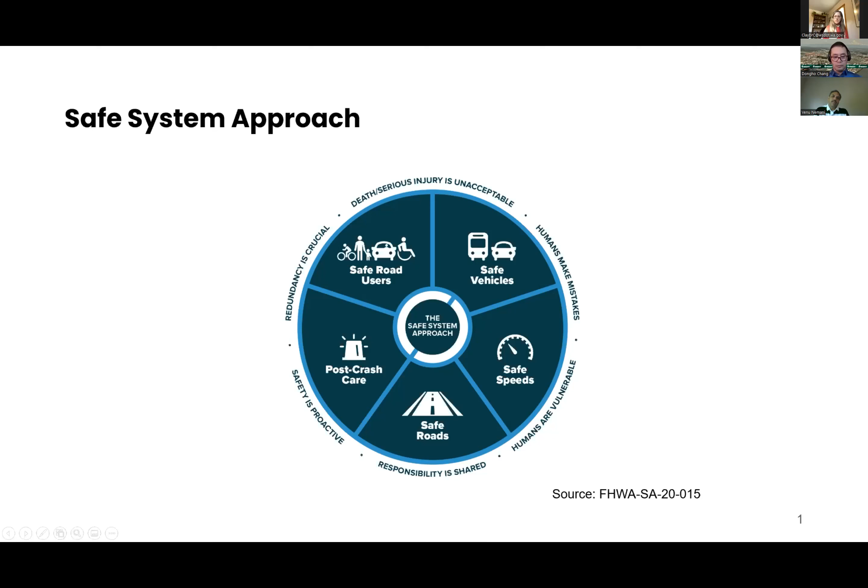Let's see, how do I... Okay, so what impacts the streets and speeds on our roads is really how our streets are designed, the laws that govern them, and sometimes the enforcement that comes with it, right?

So many of you who are in communities will recognize these same type of streets all over our neighborhoods. These are streets that are designed to make sure that goods and vehicles are moved efficiently, and they are designed in an engineering standard that performs that function.

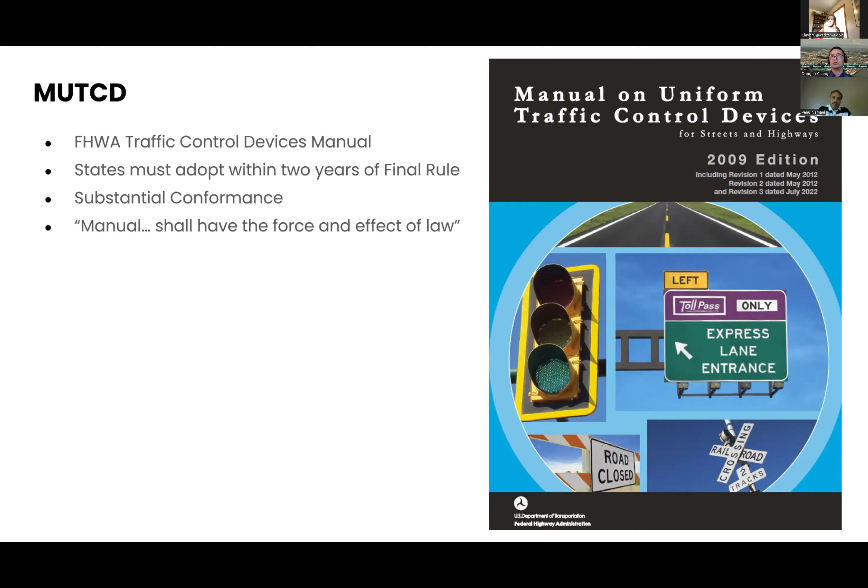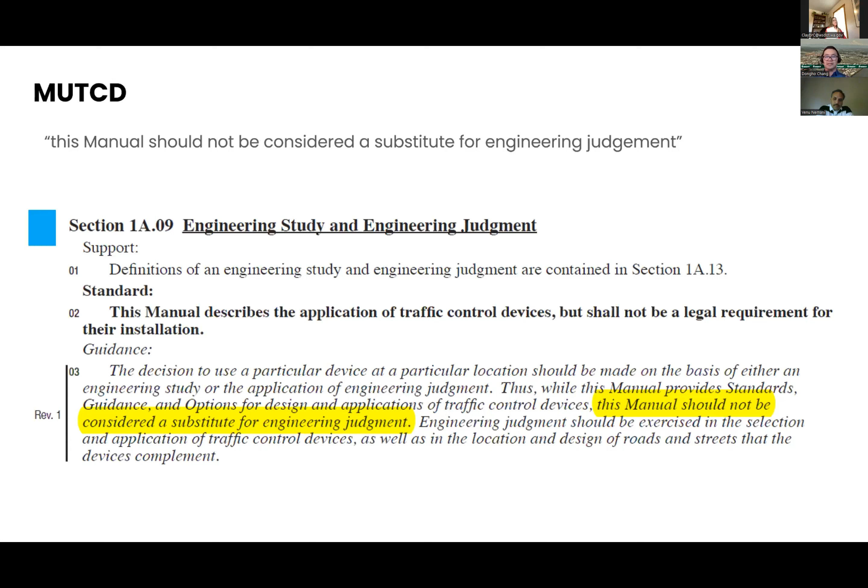And in reality, the manual is pretty flexible. So if you read through the manual, it provides that this manual describes traffic control devices but shall not be the legal requirement for their installation. And this manual should not be considered as a substitute for engineering judgment. So it means that the application of the manual is really up to the individual whose responsibility is to exercise their engineering professional judgment in applying these traffic control devices.

So again, it is up to all of us to make sure that we are using common sense and our approach to make sure that we are serving the needs of our community.

Washington State has a policy guideline called the Washington State Injury Minimization Speed Management Policy. It was developed in 2020 with a group of stakeholders, including FHWA, local city officials, engineers and traffic engineers. Really it's to adopt and implement a framework that looks at how we can minimize any kind of injuries that occur on our streets based on the context it's located in.

And we're using a safe systems approach to identify and prioritize how we make these investments and improvements, and then employ our thoughtful roadway design treatment so that we achieve the operating speed that we need on a particular facility.

So I got a chance to visit Spokane last week, and this is West Main Avenue, in the heart of their downtown. To the right was what West Main Avenue used to look like: 4 lanes, parking on both sides, pretty wide in the heart of a business district. So it's really engineered to move vehicles.

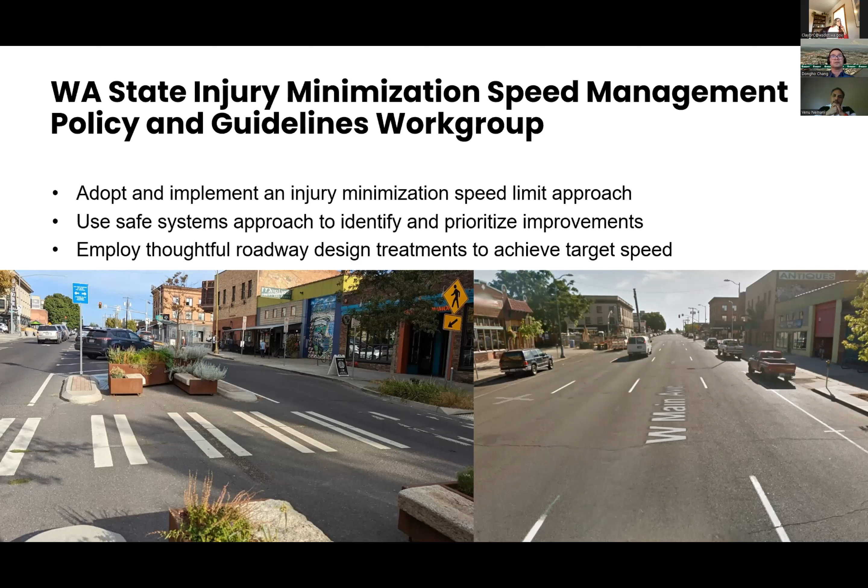These are things we have the ability to change everywhere in our environment, and these interventions have really positive consequences. It slows the operating speed of the driver, and it creates an environment where a person who is walking, biking, or a patron of these businesses has a conducive environment where they want to linger and frequent these businesses.

And how do we avoid crashes? We do that by roadway design. We separate users in space. We separate users in time with signal phasing, and we create self-enforcing design that produces the behavior we want from all users.

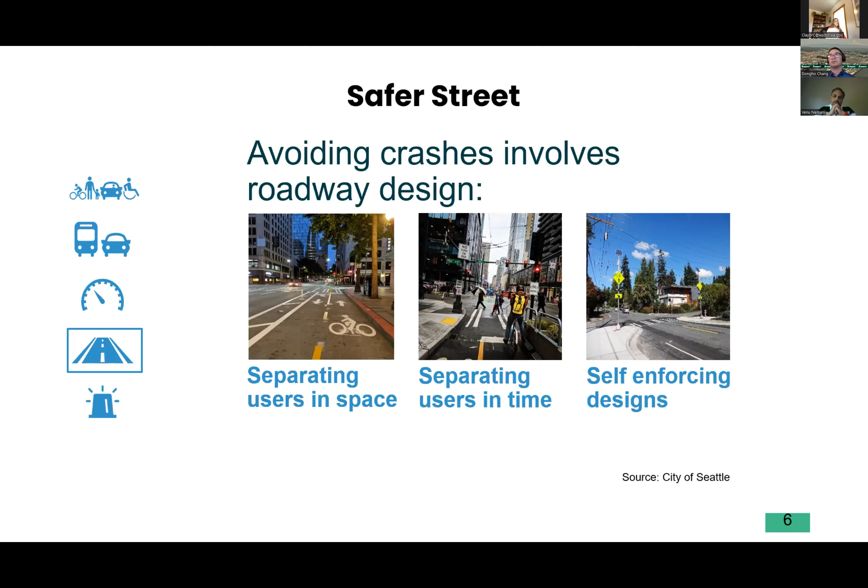The safe systems implementation is really about reducing the operating speed of the vehicle, so that we can reduce the kinetic energy. If someone does make a mistake, it's going to hopefully result in property damage, not severe injuries. And certainly, we don't want anybody to have a fatality in an interaction.

One of the tools we really look at for that is roundabouts. The design of the roundabout is really about reducing the operating speed at the location where all the conflicts occur. That's a great tool, a proven safety countermeasure that we will continue to implement.

One of the items we need to do a better job of is ensuring that we are accommodating and prioritizing pedestrians and bicycles in our roundabout design and implementation. We also need to make sure we are designing for that target speed, so we're looking for that self-explaining, self-enforcing roadway that slows driver behavior.

In the very last bottom photo, you can see a raised crosswalk in Shoreline. If someone approaches that intersection at high speed, that behavior is not going to happen a second time. It's self-enforcing design that changes behavior through geometry.

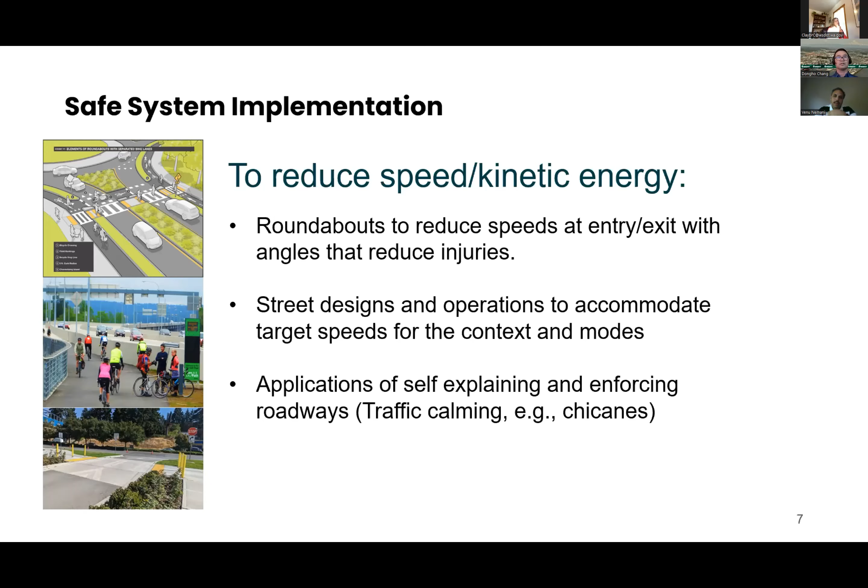Another location I got a chance to experience in Spokane was when I was traveling from the airport to downtown during week without driving last week. I was taking the bus, and what a convenient and great service it provides. I was able to witness a bicycle rider on the airport side of this connection, and I made a point to go out and experience how that person experienced the facility. There's a section that I thought was a really good change.

This is the I-90 business loop, which used to be 4 lanes with turn lanes. You can see on the left there wasn't any space for people walking and biking. In the revision, one of the lanes was repurposed for walking and biking. You can see an 8-inch wide curb that was put in to create that additional space, along with a crossing treatment.

By and large, the experience was night and day different. On this portion of the roadway, if you're on the separated facility, it's much more conducive to a comfortable experience. The other side has a painted bike lane, and it's 40 miles per hour, but it feels quite a bit faster—not as comfortable, not as convenient, and not a facility I would feel comfortable using every day.

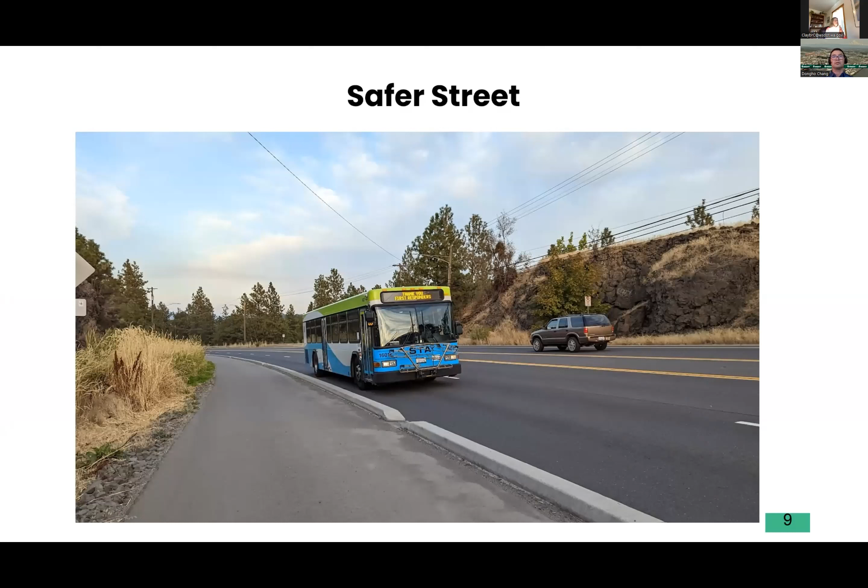So there are tools, easy to look at, where we can repurpose streets and lanes to accommodate safer behavior. And of course, drainage—you can create an opening, and that's what this project did, creating an opening in the curb to make sure water flows into that little wetland ditch. It's 12 feet wide so you can get a sweeper in there, easily maintainable, and it created a great environment with a minimal amount of additional infrastructure.

There are things you can do with just how the intersection is implemented.

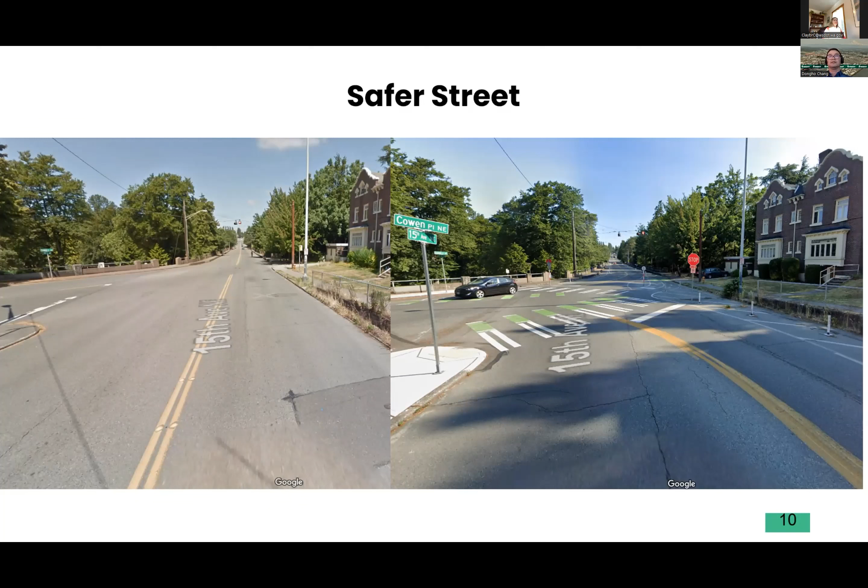There's a park on this one side. There's a high bike ridership in this corridor, and it definitely serves the multimodal, all-users better with the intersection reconfiguration.

I also want to highlight things that we as a profession are trying to revise with the new legislation, really thinking about holistically how we're accommodating all users on our roadway.

This is SR7 down in Spanaway, where a number of collisions are occurring, and as part of our safety review, this location came up for evaluation. One of the things we looked at was the site conditions: high speed, rural condition coming into a developing area, 55 miles per hour coming into a shopping center, moderate residential, and housing development coming up in the future.

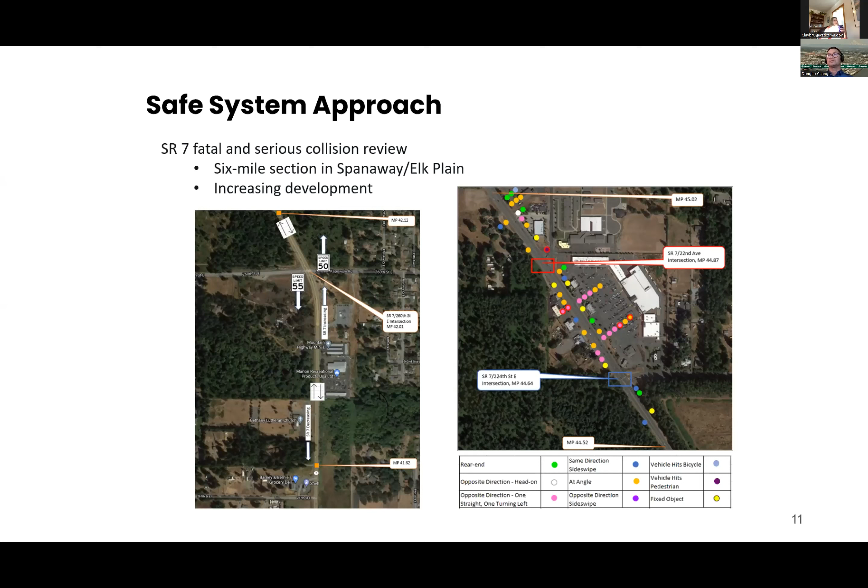Collisions that are occurring, you can see with all the colorful dots, and it's increasing over time just because of the number of interactions occurring. I'll show you what it looks like at that location where all the collisions are happening.

This is actually a location I'm very familiar with - this is where I grew up. You can see there's no pedestrian facilities. It's 50 miles per hour, pretty high speed, pretty daunting area. There's bus service here, and not much space if you're not in a vehicle. And even if you're in a vehicle, it's not a very comfortable space.

This is Field Road, the location I had to cross every day. I crossed Field Road to get to that 7-Eleven as a kid in elementary school. We used to gather and play video games - my best friend's across the street here. So this was my daily crossing. And earlier this year, someone walking across was killed crossing the street.

The prior paradigm was that we would look at maybe a crossing treatment, but what's really important about this location is that as it develops, there's going to be more and more people walking and biking. There are already people doing that. It's a lower income area, there's mobile homes, people who cannot afford a vehicle - they're taking transit, they're walking to the grocery store. Really, it's the operating speed that's not very comfortable.

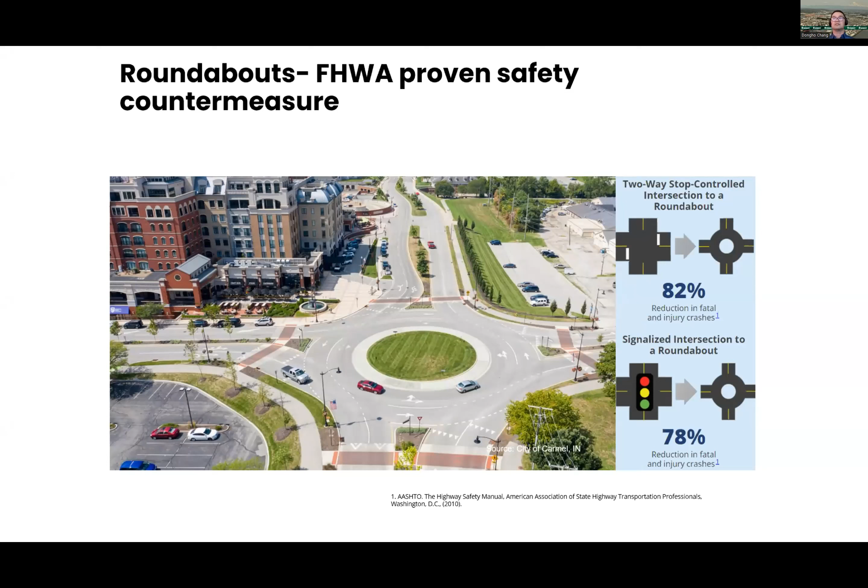And these roundabouts are so effective - they have a history of improvements, an 82% reduction in serious and fatal injury crashes when a stop control intersection is converted to a roundabout. If you have a signalized intersection, it's just as effective, almost a 78% reduction.

You may say that's actually 50, 55 miles per hour, it's a high-speed facility, how is that going to work? Well, we've tested it out in a high-speed facility. This is Mattawa, Washington, 65 miles per hour. Not much in terms of friction.

It's a rural roadway, but experiencing severe crashes where the community has to cross this roadway. During peak time, the gaps are really hard to find, so there's a huge amount of queuing that occurs. People get pressured and take chances trying to find a gap that might not be appropriate.

The community embraced the roundabout as an option to test out. From that 5-year period: 21 crashes, 22 serious injuries, and 2 fatalities. The roundabout was put in, and within the 7 years afterwards, no serious injuries or fatal crashes. It really has proven itself in terms of safety performance.

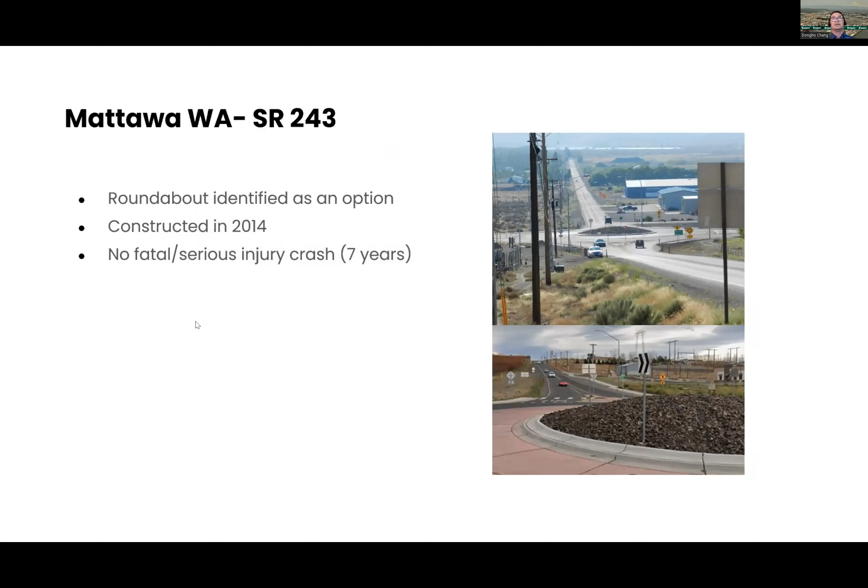So the MUTCD, again, it's really flexible. Ask your engineers, your municipality, to work with the flexibility that's given.

Pilot project, this is Bell Street. It was converted to a park, Bell Street Park. You can see the change in the physical environment from a roadway that's really designed for vehicles to a space that's conducive for people walking and biking.

In this location, a memo was created that established this as a park boulevard, and the features designed to guide traffic are being removed. You can see on the picture on the right, initially vehicles were meant to turn right. If you go there now, those vehicle signal heads are gone, and the vehicles actually cannot go through.

It's a stop condition, and pedestrian and bike prioritized. Even the street name sign is brown to signify that it's a recreational space.

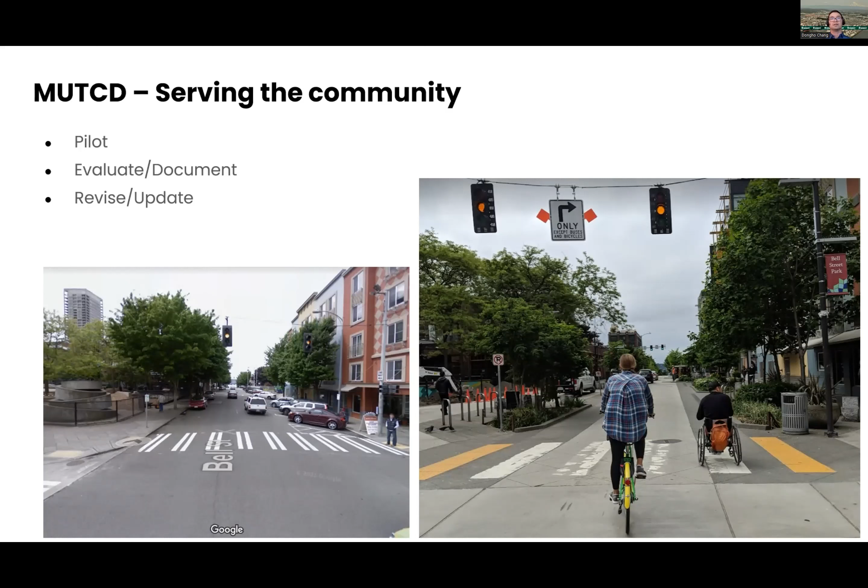Again, a daunting crossing location. We're never going to get the volumes of people crossing at this kind of condition. You have to prioritize that movement, put in the installation so people can cross, and make sure you have all the implementation in place so it's easy to utilize. And if it's not, you've got to figure out why and make sure those elements are fixed.

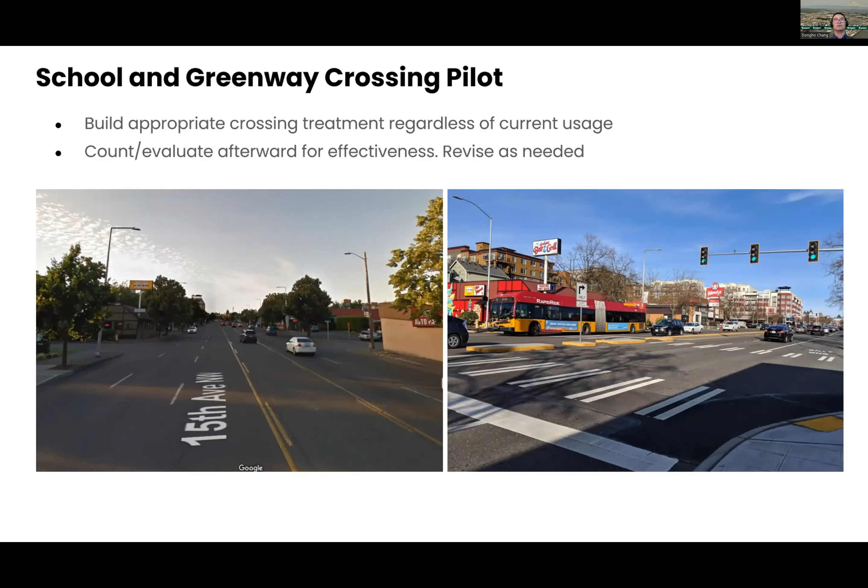We have data that shows it is very effective. It has huge safety improvements, and a broader safety improvement for the whole area.

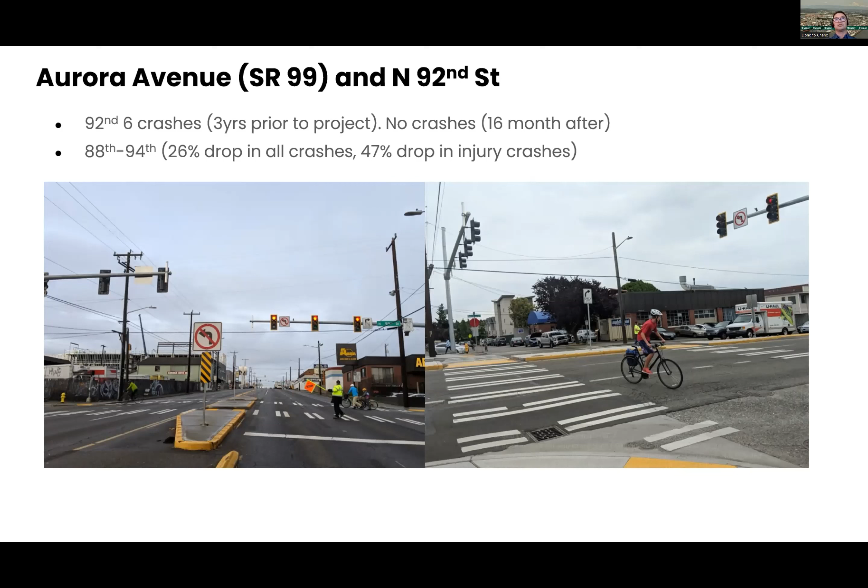In a broader area, we saw a safety benefit of a 26% drop in crashes approaching the intersection, and almost a 50% reduction in injury crashes. That's because people are slowing down. The environment has changed, operating speeds have changed, and you can do physical changes like raised crossings to make sure people are operating their vehicles at appropriate speeds.

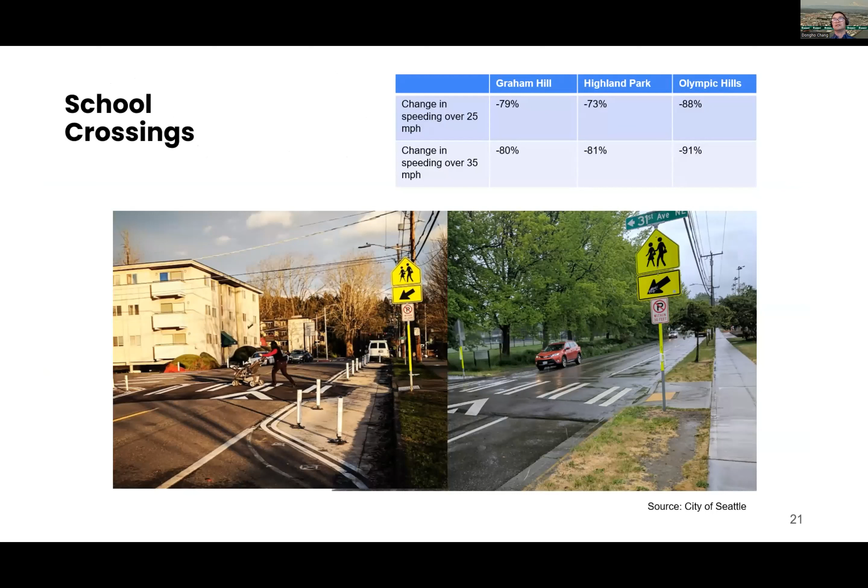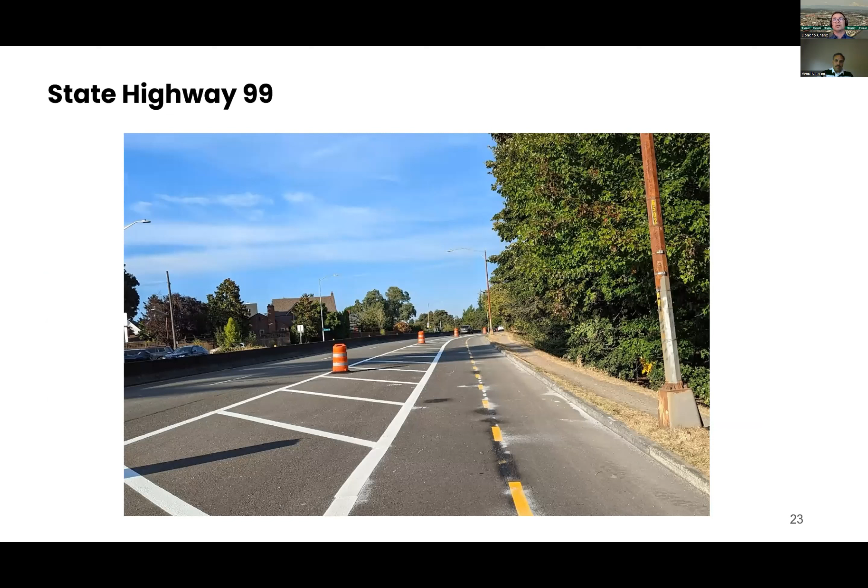Of course, we're trying things out like on Green Lake, repurposing that space. That project is happening now, where we're taking one of the outside lanes and creating space for people walking and biking. Why are we doing that? Just making sure we're making facilities comfortable for all users, especially people who would not even venture into those types of spaces if we do not take this action.

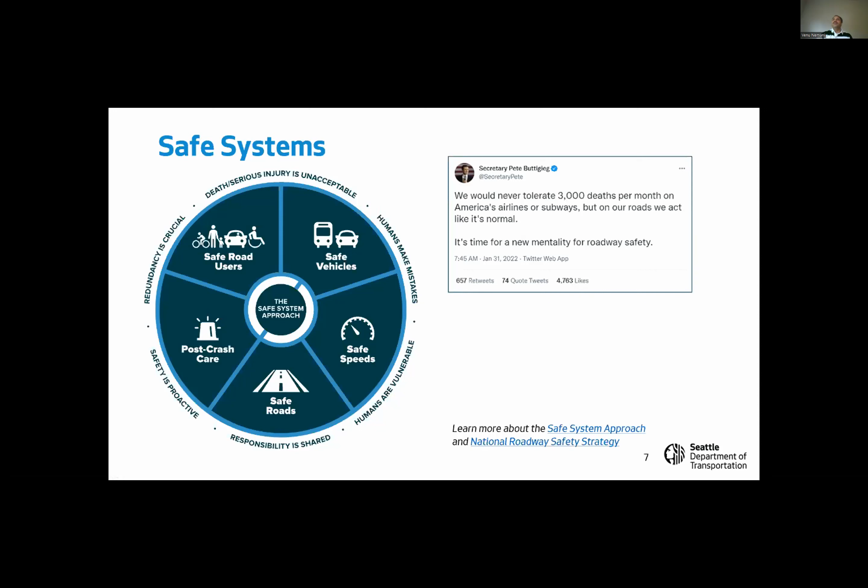So here is the safe systems approach that Dr. was referring to, the two quadrants where we have most influence: safe speeds and safe roads. I want to share a quote from our Secretary of Transportation, Pete Buttigieg. He tweeted, 'We never tolerate 3,000 deaths per month on America's airlines or subways, but on our roads, we act like it's normal. It's time for a new mentality for roadway safety.' I can't emphasize enough why this encapsulates why we need a paradigm shift in our thinking and how we approach safety.

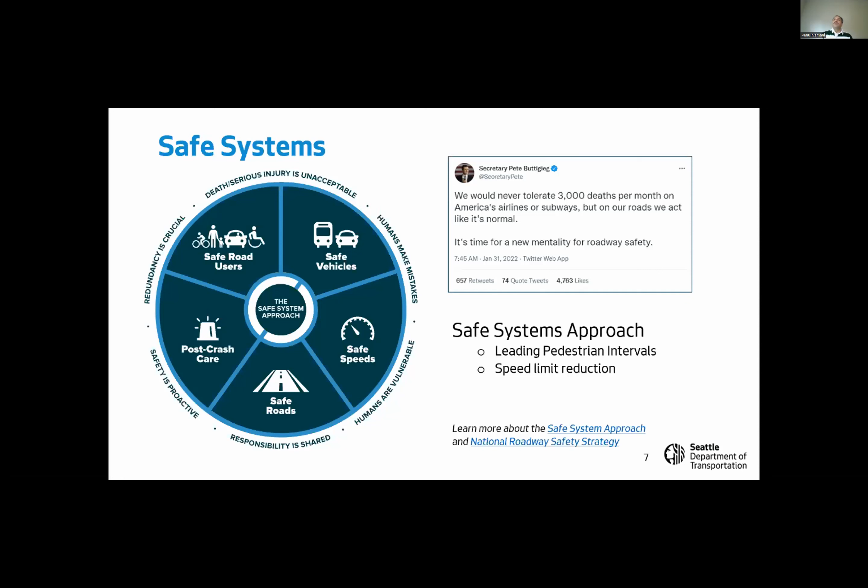So I'll give you two examples of our safe systems approach: leading pedestrian intervals and speed limit reductions. We have done substantial work in the recent past on our streets. The first one I want to talk about is leading pedestrian intervals. We know that about 40% of our serious and fatal pedestrian collisions occur at signalized intersections. A leading pedestrian interval gives pedestrians a head start to establish themselves in the crossing so that they're more visible to turning traffic at signalized intersections, thus avoiding serious and fatal collisions.

Over the years, we had very few intersections that had leading pedestrian intervals, and now we are doing this systematically, and we have improved almost tenfold the number of intersections in Seattle that have leading pedestrian intervals.

Every time we go through a corridor signal retiming, we ask ourselves where can we implement these leading pedestrian intervals, and make it a default of placing them and part of our timing plans. There are significant benefits: a 50% reduction in injuries, a 35% reduction in serious and fatal collisions.

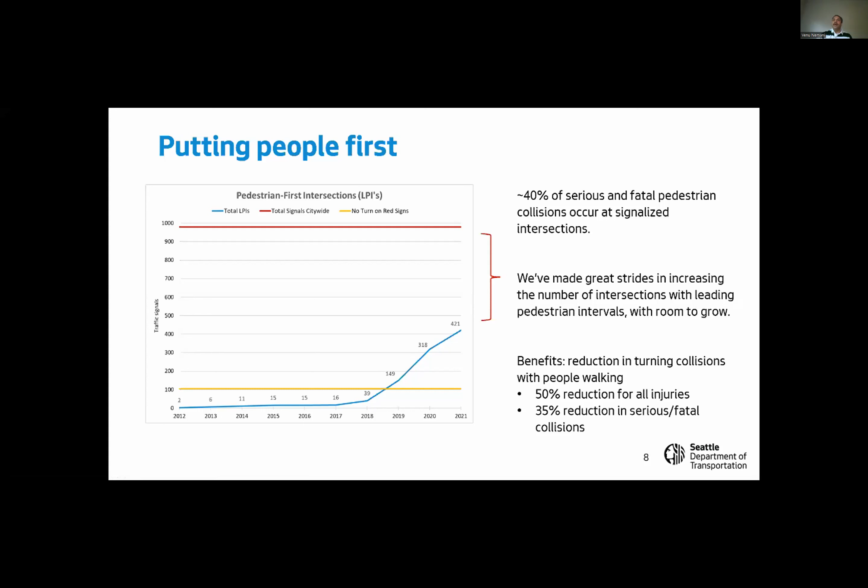Another intervention I want to point out is no turn on red. We are working right now to apply the same safe systems, systemic approach to employing more intersections that have this no-turn-on-red restriction, which helps with the pedestrian and turning traffic conflicts we see at intersections. We are getting ready to package this up and get started on implementing it on a more system-wide basis, and you'll see that in the near future.

So let me take a little bit of a different direction and go through what guides our design philosophy to influence or have slower speeds on our streets.

We base all our design ideas on our Streets Illustrated, which is our right-of-way improvements manual. It provides guidance on street design and informs our complete streets checklist, filled out for every single project, asking how that project is influencing the design and addressing concerns of pedestrians, bicyclists, and how we will accommodate transit.

So our Streets Illustrated establishes a typology based on the place of that particular street in our network and also the function it serves. We have about 12 different street typologies, with certain target speeds assigned to them, and our designs in Streets Illustrated consciously try to promote the target speeds established for these various sections.

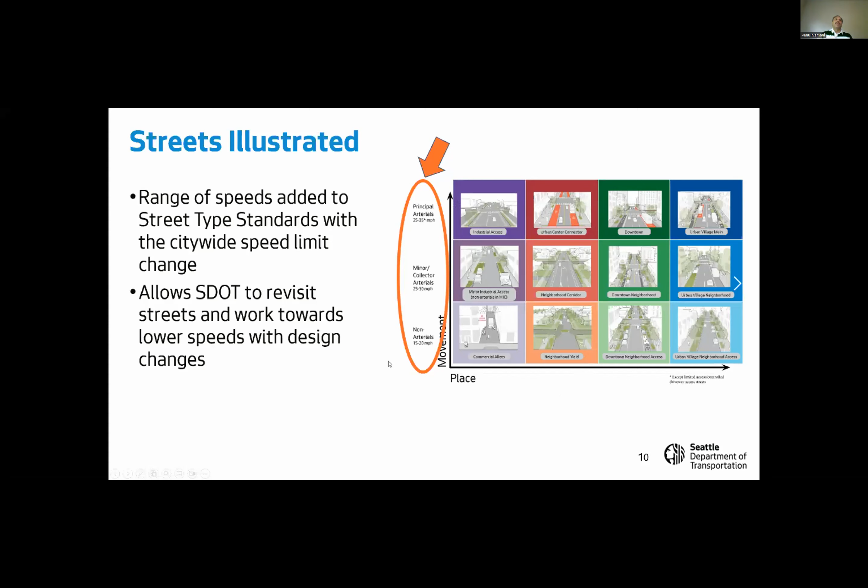So let me go into a little bit deeper dive into traffic calming. We have a whole bunch of tools within our toolbox to influence speeds and lower them on our street network, and I broadly classify them into two groupings: arterials and non-arterials.

Within arterials, I'm going to talk about our citywide speed limit change and various street redesign and reallocating space strategies employed on a number of projects. I'll talk about speed cushions, raised crosswalks and intersections, hardened center lines and robust center line posts, which are a relatively new strategy we are piloting, and radar feedback signs, along with a new effort to understand speeds on our network.

Similarly, on non-arterials, there is a list of tools in our toolbox that we employ as we go through their street redesigns.

So let me first start with the citywide speed limit change. We did complete and employ a citywide speed limit change. Most arterials within Seattle are now posted for a 25-mile-an-hour speed limit. Here's a comparison of the lane miles that had the speed limit before and after the change. As you can see, beginning in 2021, almost 90% of our arterial speed limits were reduced to 25 miles an hour.

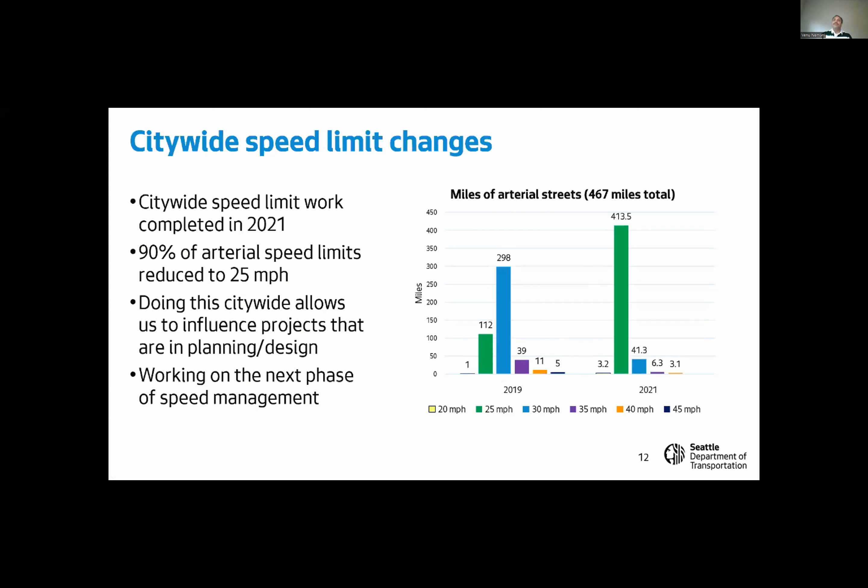So how did this speed limit change affect things? We did some before-after studies, and without any educational or outreach activities, just changing the speed limit and consistently posting it at quarter-mile intervals on the arterial segments, we saw the 85th percentile speeds change moderately, but we saw higher reductions in top-end speeding, people going more than 10 miles over the speed limit, since we made this citywide speed limit change.

Again, from a crash performance perspective, the total number of crashes on average, before on the 3 or 4 segments that we have seen, and 1 year later we have seen a substantial reduction in the total number of crashes on these exact same segments where we lowered the speeds.

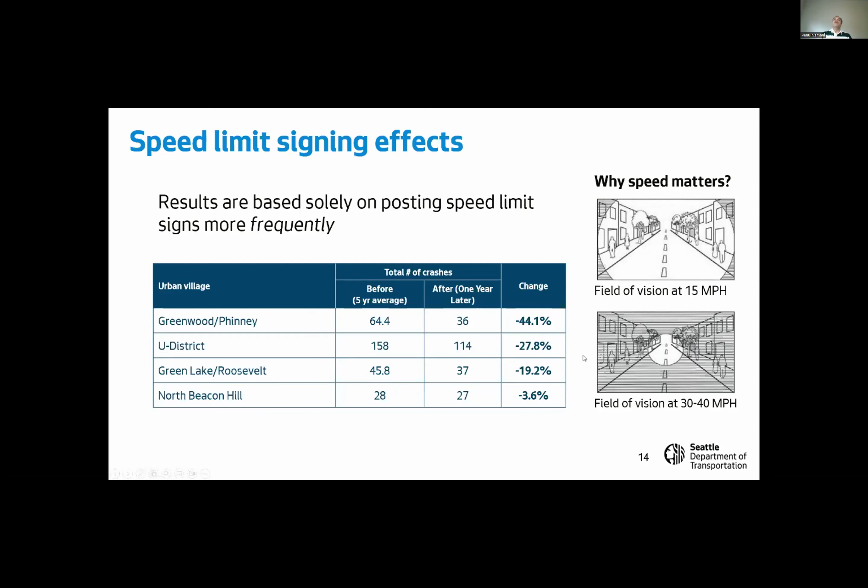Again, Danko showed several examples of reallocating space. This is, I believe, the most significant strategy on our arterials to influence the design and change the behavior and lower speeds. The example I would point to is on Rainier Avenue. We did a phase one of this project in Columbia City and Hillman City, where we took a 4-lane road, implemented a road diet, and completely reconfigured the street, as you can see in the before and after pictures.

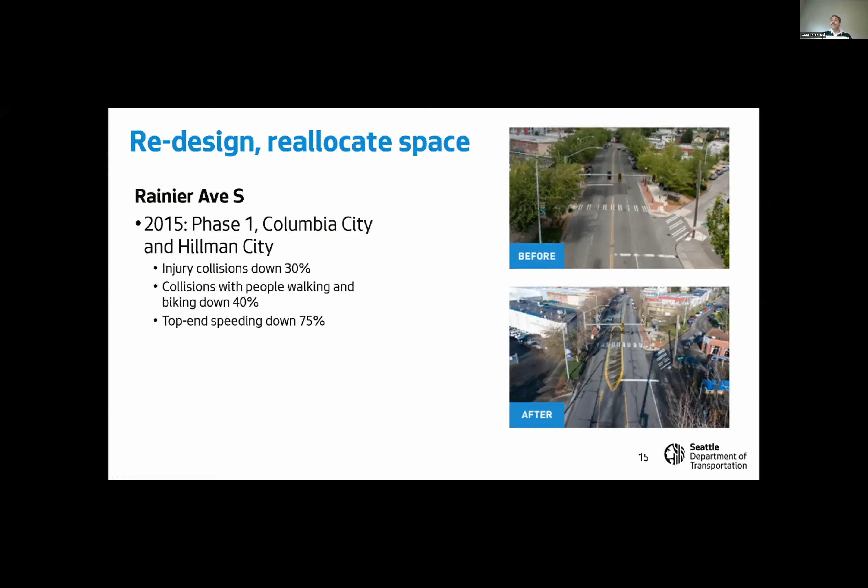Our injury collisions were down by 30%. Collisions with people walking and biking were down by 40%, and top end speeding was down by 75% - substantial improvements.

Most recently, we are continuing several phases of this work, and in 2022 we have prioritized transit on this corridor. Again, reallocating the space that we have on the street and prioritizing and giving space to transit, reducing that footprint or the impression of drivers that it's a wide open roadway and they can take higher speeds. This particular transit improvement or street reallocation design also helps the Route 7 transit line. It's one of the highest ridership routes in the state and a lifeline for the Rainier Valley community. It enhances their transit speed and reliability, especially during congested peak hours, and makes progress towards the city's climate and equity goals.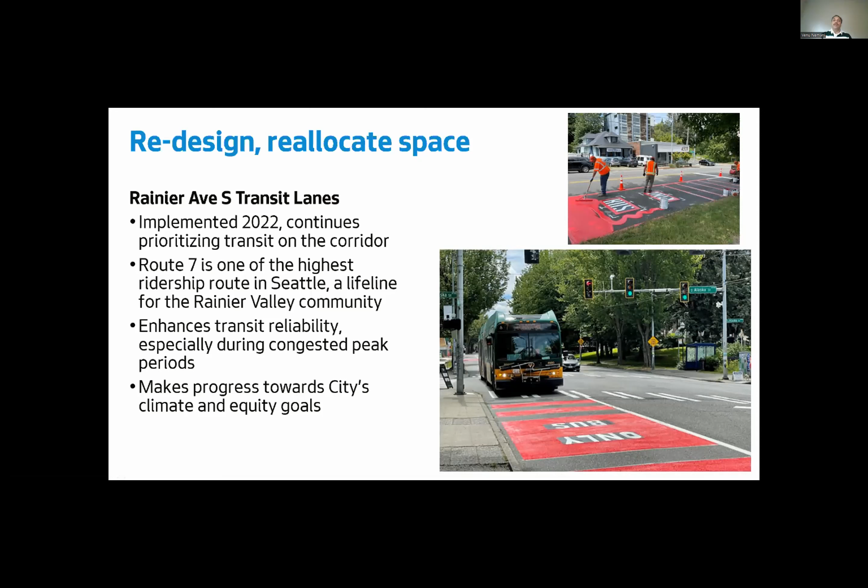Another example I'd like to point out is Northeast 65th Street. This is another street reallocation project we have done between Northeast Ravenna Boulevard and 39th Ave Northeast. Here, the way we approached the street reconfiguration was to reallocate the space to put in protected bike lanes, lower the speed limit to 25 miles an hour, install pedestrian countdown signals at several intersections, upgrade signal phasing to include protected left turn phases, and install a hardened center line on Roosevelt Way and repaint a lot of crosswalks.

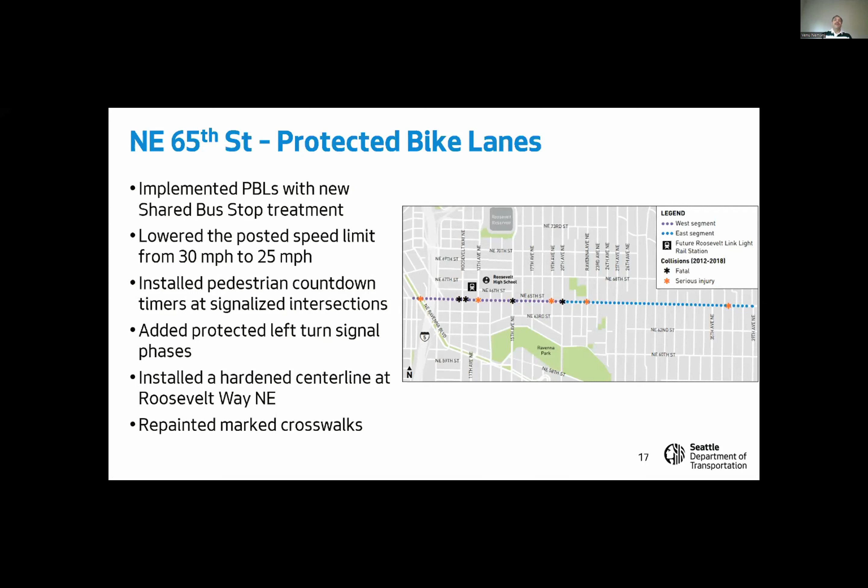Ever since we did that, you can see both in the west and the east segment there was a substantial reduction in the average annual crashes reported on that particular segment - pretty much no left turn collisions in 2019, and a 67% reduction in pedestrian collisions on the same corridor.

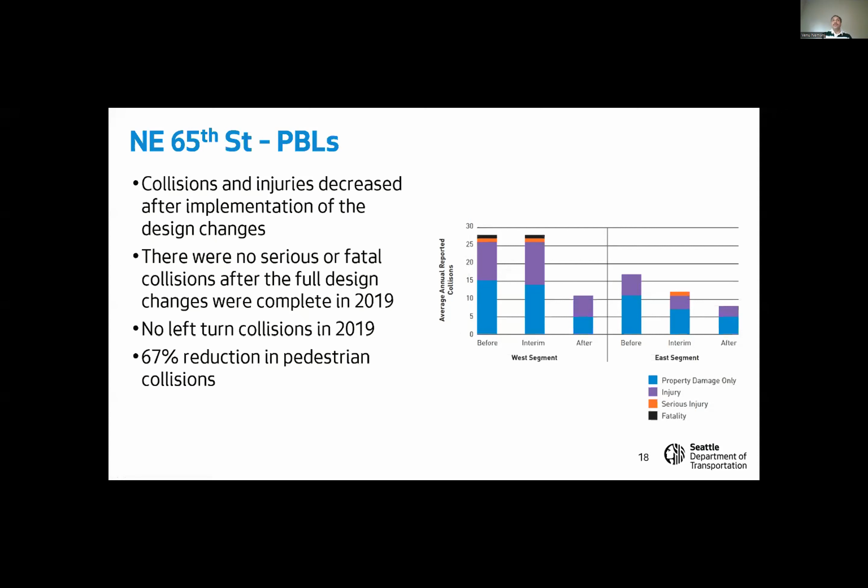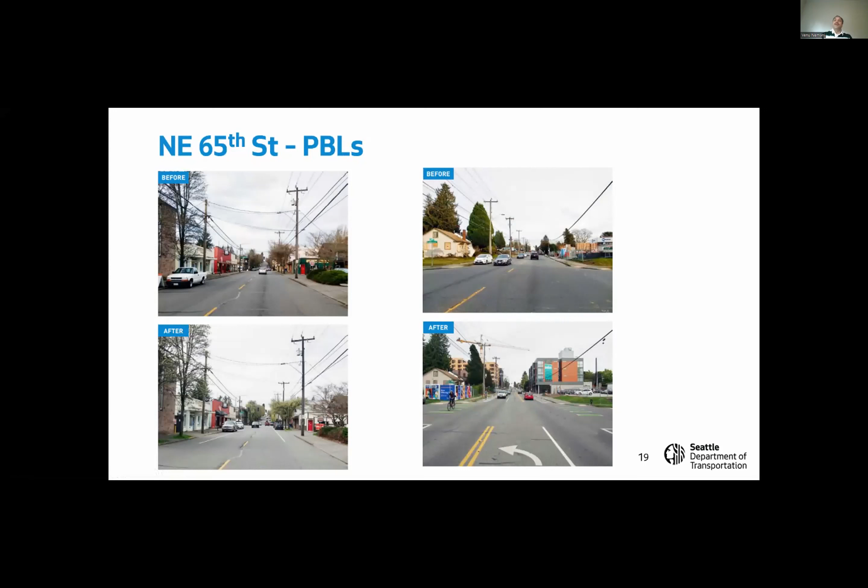Just to give you a visual of how the street segment changed - the one on the right is the east segment, and the one on the left is the west segment. As you can see in the before condition, it's a wide open lane with just a center line marking. In the after condition, you can see the protected bike lanes that reallocate and basically narrow the field of vision of the space that motorists could use, implementing more friction so that motorists are not tempted to drive as quickly as possible through this section.

We did something unique on this particular corridor: we incorporated the bicycle design and the pedestrian and bus loading activity through a combined zone, so that we could use the existing curb-to-curb space to not only serve bicyclists, but also to serve our transit riders and transit ridership.

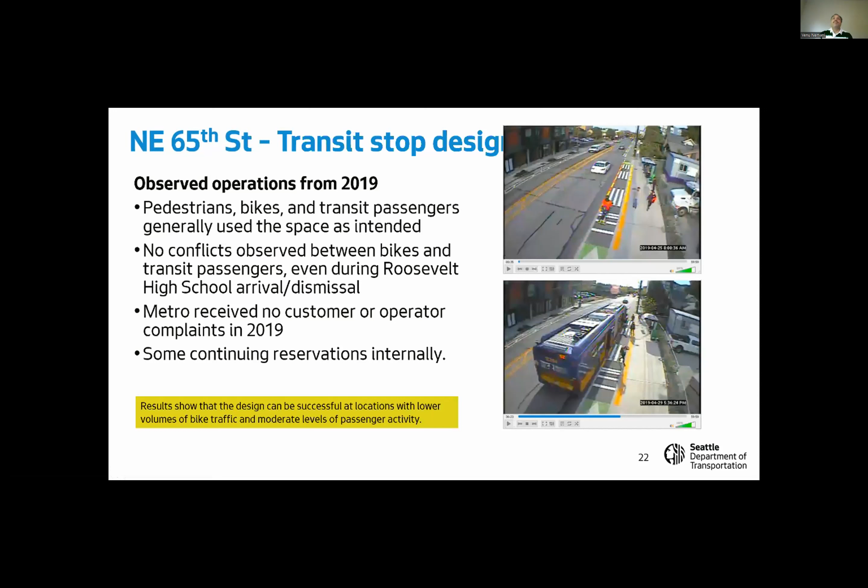So this is how it looks after construction - it's a shared stop that you can see at several locations on Northeast 65th Street, and it's been a success. When we went back and studied the interaction between bicyclists and passengers, either boarding or alighting at these bus stops, we have some continuing reservations internally, but overall it has been a really good intervention that changed and reconfigured the street. We haven't heard anything negative from our Metro partners, and that really counts as a success.

Another thing that we use on our arterials is speed cushions. Speed cushions are basically like speed humps, but with slots in between them to accommodate the wheelbase of emergency vehicles, so that we impact general purpose traffic, but still give emergency vehicles the opportunity to go through while maintaining their speed.

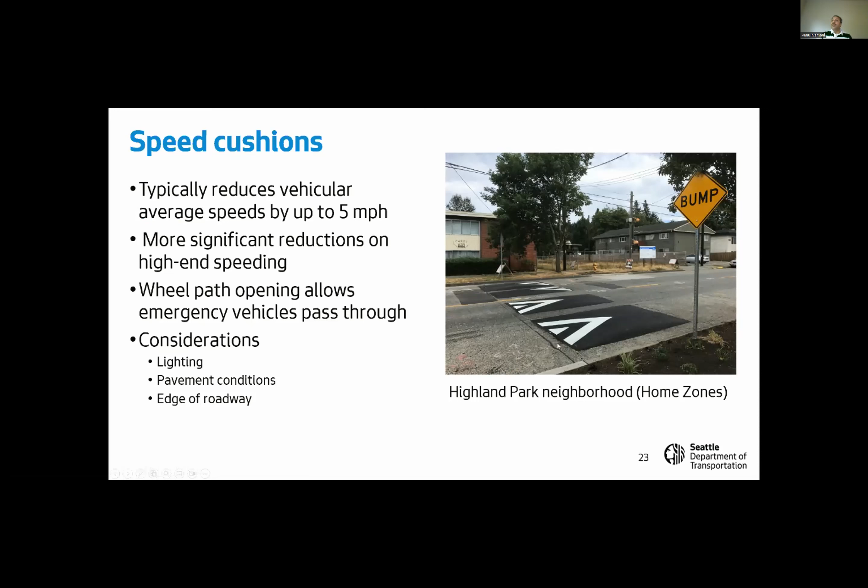What we have seen typically is a reduction of up to 5 miles an hour on average speeds, but really where this becomes effective is with significant reductions on the high-end speeding. Some considerations are to make sure we put these where we have good lighting, and look at pavement conditions and the edge of roadway. This is an example from Highland Park neighborhood where we did a home zone project and installed speed cushions.

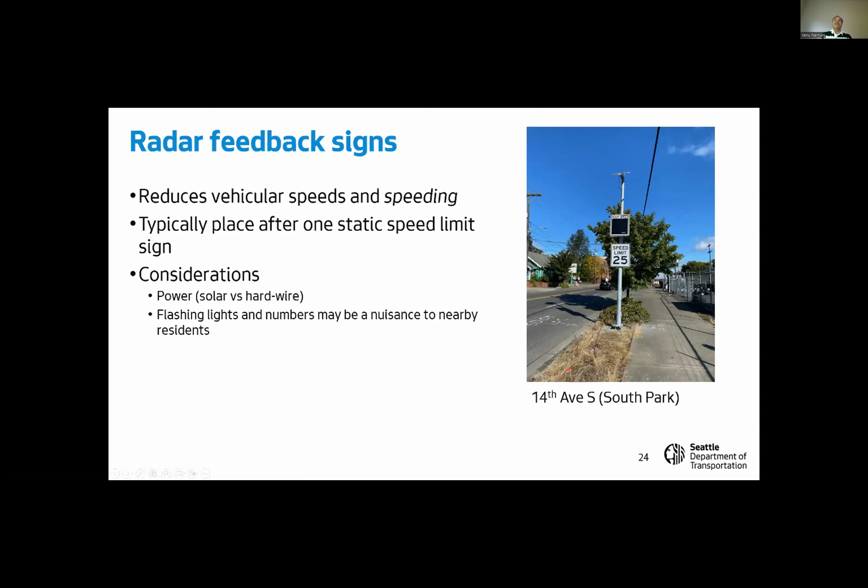Radar feedback signs are another strategy we use to influence motorist behavior on arterials. These are dynamic - they capture the speed of the approaching vehicle and provide information feedback back to the driver to influence their speed behavior. We've used this on a number of locations on our arterials, and sometimes these can be solar powered or hardwired.

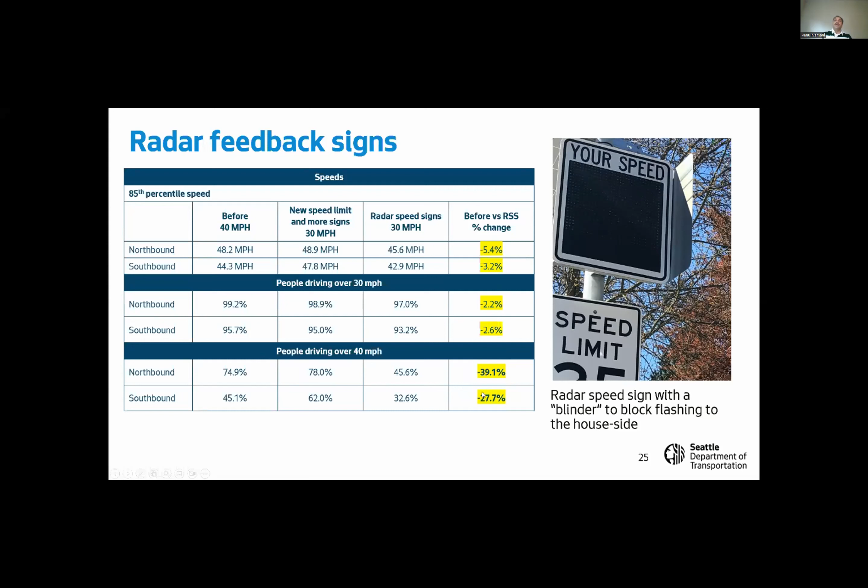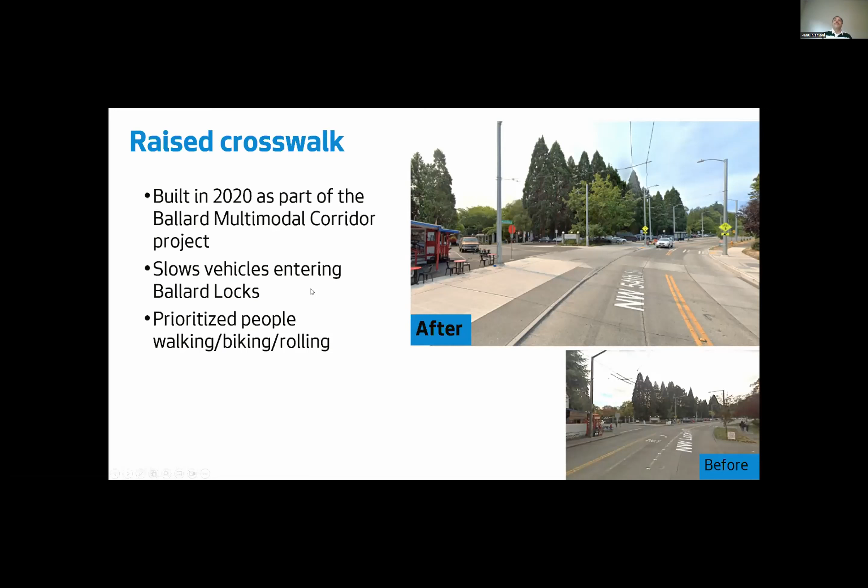Raised crosswalks. Here is an example of a raised crosswalk at Ballard Multimodal that we implemented as part of the Ballard Multimodal project. It basically shifts the paradigm of pedestrians being in the space of motorists as they are turning, to motorists being in the space of pedestrians as they make their turning movements, slowing down vehicles entering the Locks and prioritizing walking and biking.

We are exploring raised crosswalks in more locations across more arterials to reap similar benefits of implementing them.

Another recent tool that we are testing is hardened center lines. These are basically plastic strips that form extensions of the center line at intersections, so that a turning vehicle, rather than taking the most expeditious or fastest path through an intersection, has to make a slower and more circuitous path when turning, thus slowing down and looking for pedestrians crossing at the intersection.

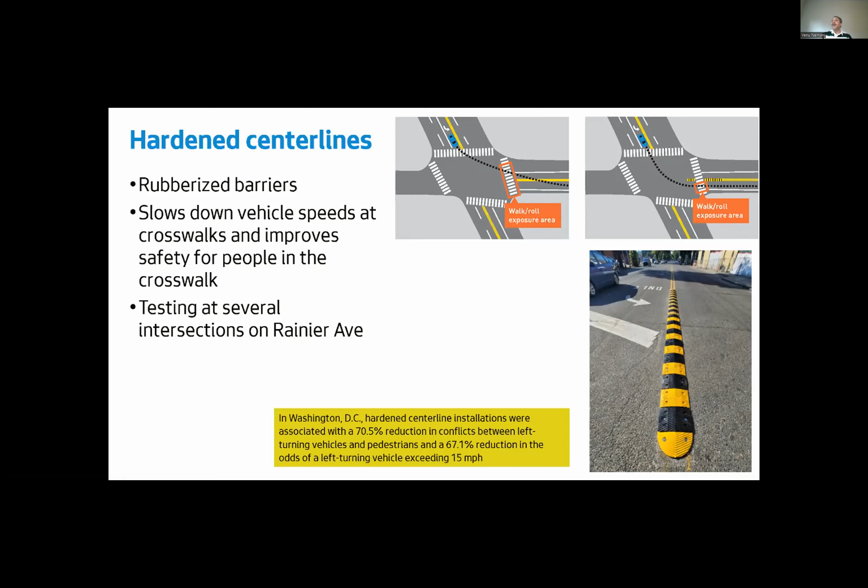We are testing this at several locations, and our testing still continues. I know that several other jurisdictions like Washington, D.C. and New York have used them more consistently across their intersections, and we want to see what their performance is on city streets here in Seattle, and explore this innovative measure going forward.

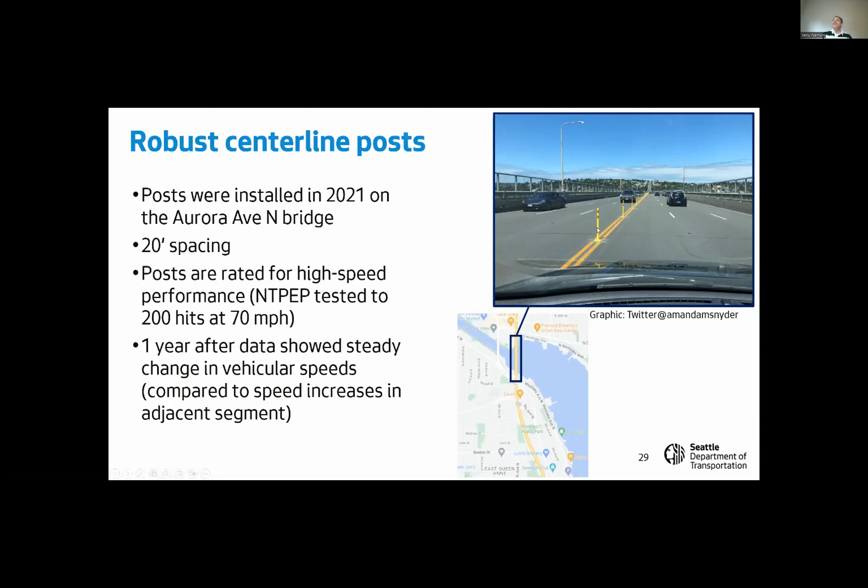Robust centerline posts - again, this is Aurora at the Ship Canal. We installed these posts in 2021 to change the perspective of motorists negotiating this section and slow down their speeds. These posts are tested for high speed and high performance, each one can take up to 200 hits at 70 miles an hour. That's the data we got from the vendor, and our experience was very similar - these posts still stand up after a year of evaluation.

Another thing I want to share is data. We collect speeds at certain locations throughout the city during our normal course of action, but what we've done this year is gone out and bought third-party data from a company called Iteris. The product is called Iteris ClearGuide.

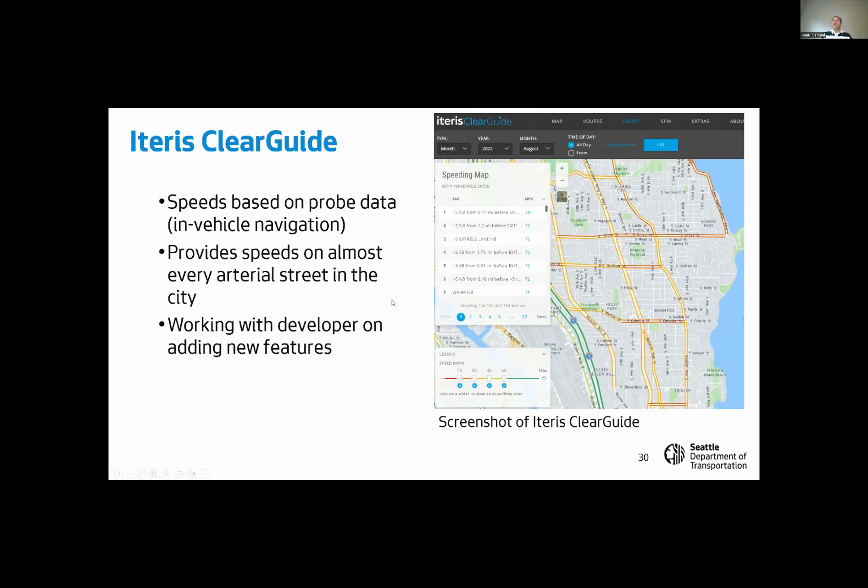What this uses is the probes inside connected vehicles, anonymizing their trip data to give us information on speeds on our city streets. This has been tremendously useful, and everybody in the department is using this tool to understand what speeds are on various segments where we haven't had a chance to go out and collect data, to identify high speed segments and formulate interventions to deal with those more proactively.

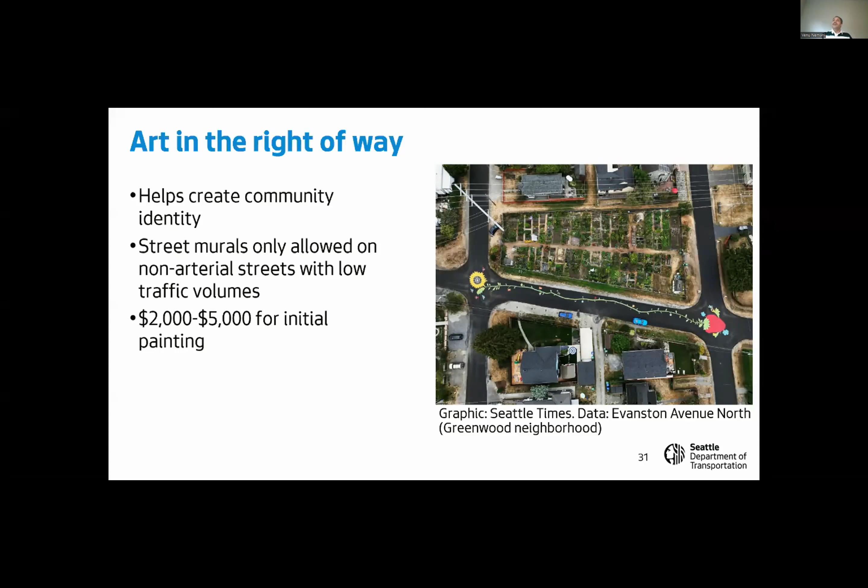I want to shift slightly from arterials to non-arterials. We have a whole bunch of tools. Art in the right-of-way is something we encourage the community to establish that identity through street murals on non-arterial streets. These are low-cost options that create a sense of space for the neighborhood and influence how motorists see or use the streets.

Walkways are another intervention we use to reconfigure street space to provide walking and biking opportunities, letting folks use the street and reducing the cross section available for motorists, so they don't speed through neighborhoods or travel at faster speeds.

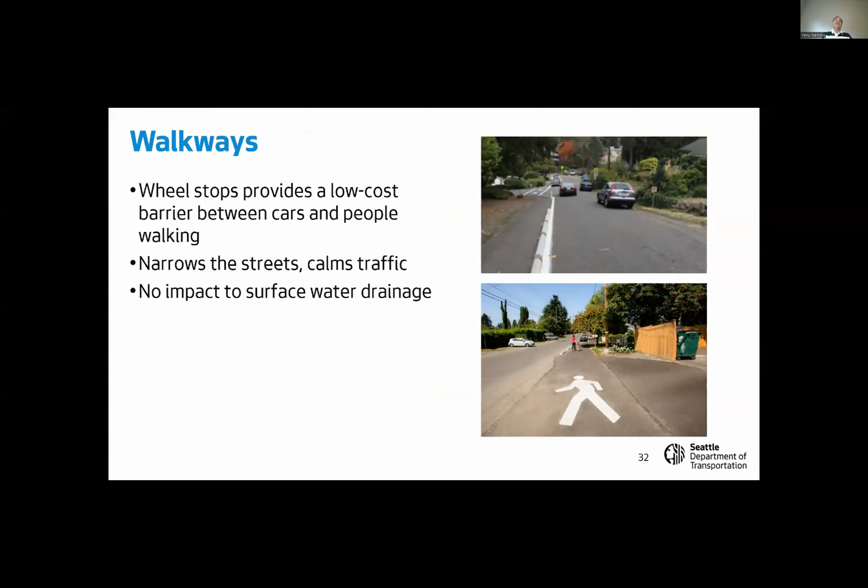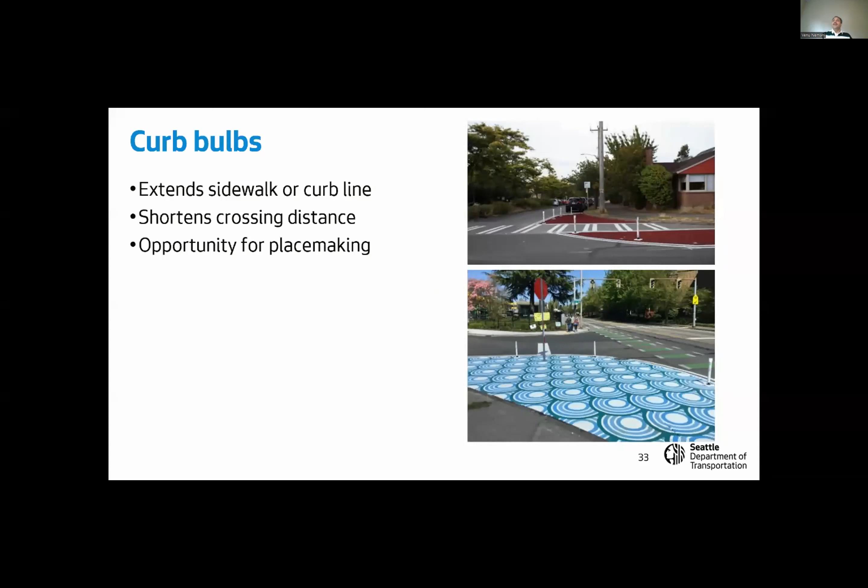Curb bulbs and curb extensions are another tool we use on a variety of intersections, both arterial and non-arterial, to slow down turning traffic as they make their turns, and also to minimize the crossing distance for pedestrians and bicyclists, reducing their exposure and improving safety outcomes at those intersections.

Partial street closures are another tool we use to prohibit traffic from entering, shifting the function of the street to provide more access and prioritize people walking and biking in both directions.

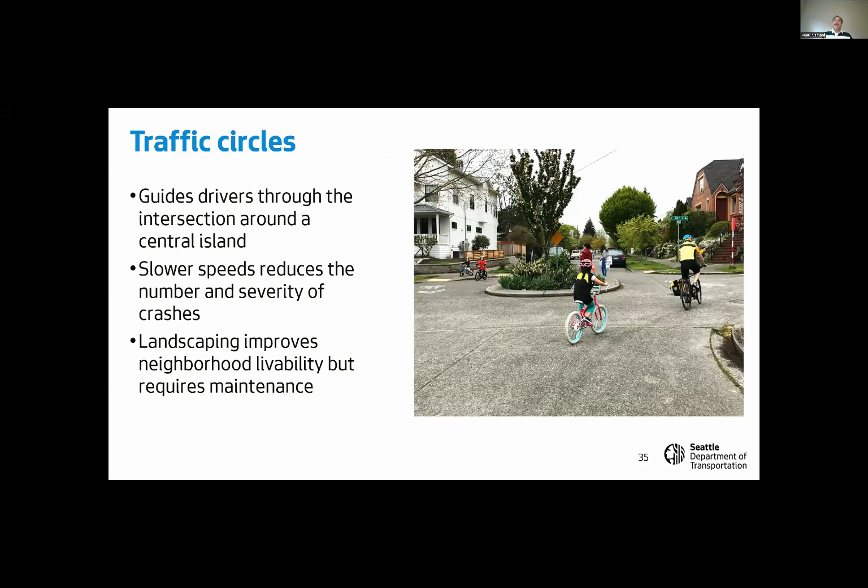Traffic circles have been another tool. We have over 1,200 traffic circles in our neighborhoods that change how motorists view those streets, and rather than going straight through, they cut down speeds on residential streets.

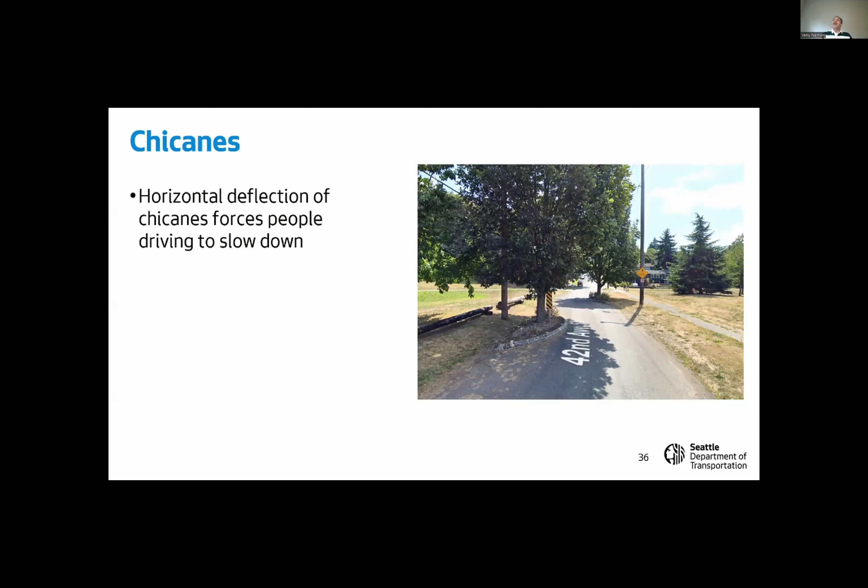Chicanes are another example of taking out that straight line path and making people take a more indirect path as they negotiate and influence their speeds.

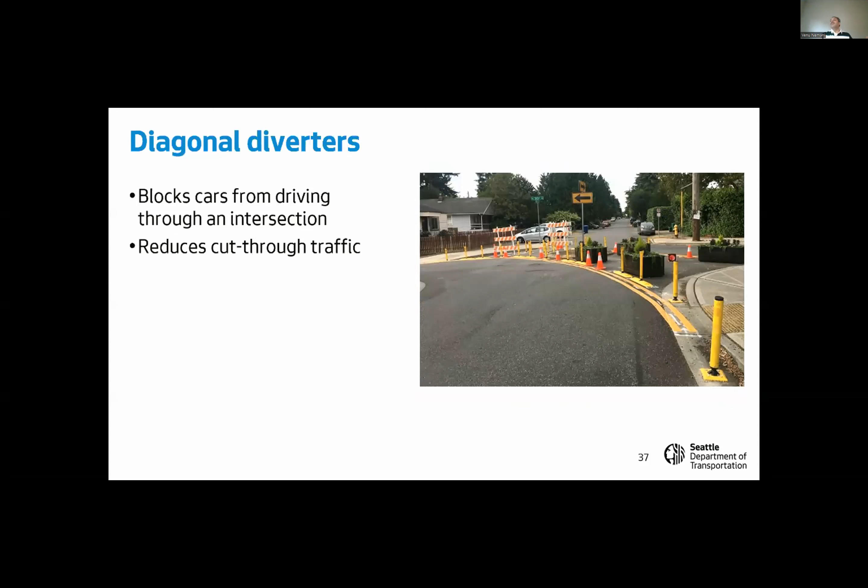Diagonal diverters are another example of taking traffic off the streets and trying to avoid providing direct routes that would encourage both traffic volumes and speeds through our neighborhoods.

I purposefully focused more on engineering measures within what we're doing on our street network, and restricted myself from talking too much about enforcement, because I believe that to promote safer streets, we have a lot more responsibility from a street redesign perspective.

But we do have automated enforcement, both in school zones, which we effectively use, and red light cameras, and we are piloting automated enforcement for blocking the box and transit lanes.

And education - I lean less towards this, but we do have some campaigns, a joint public safety campaign with Portland Bureau of Transportation to communicate the message that slower speeds is what we want to promote, and we do that through our Safe Routes to School program to educate kids and set early good behavior patterns.

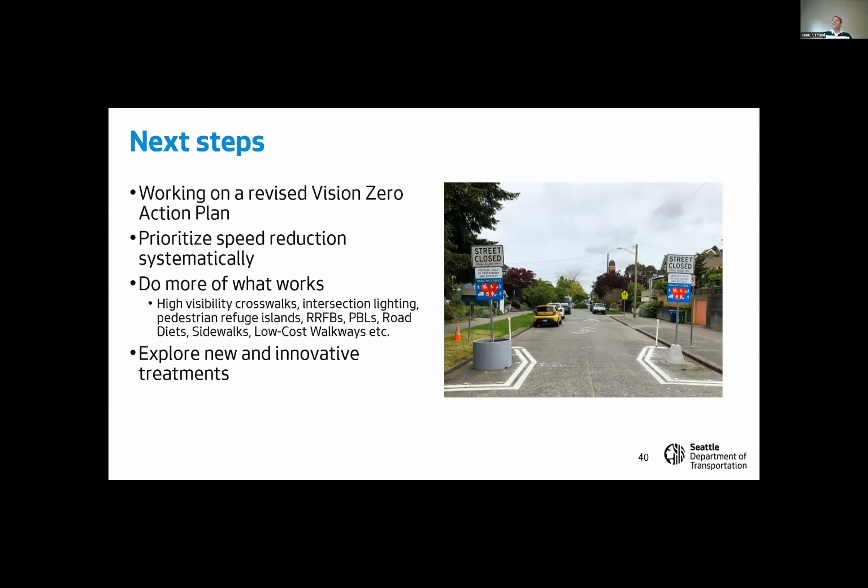Next steps - where do we go from here? We are right now working on a revised Vision Zero action plan that prioritizes speed reduction systematically. We know where our interventions work and what those are, but how can we scale those up and implement them on a larger scale across the city is something we'll be focusing on going forward, and also exploring some innovative treatments on influencing speeds.

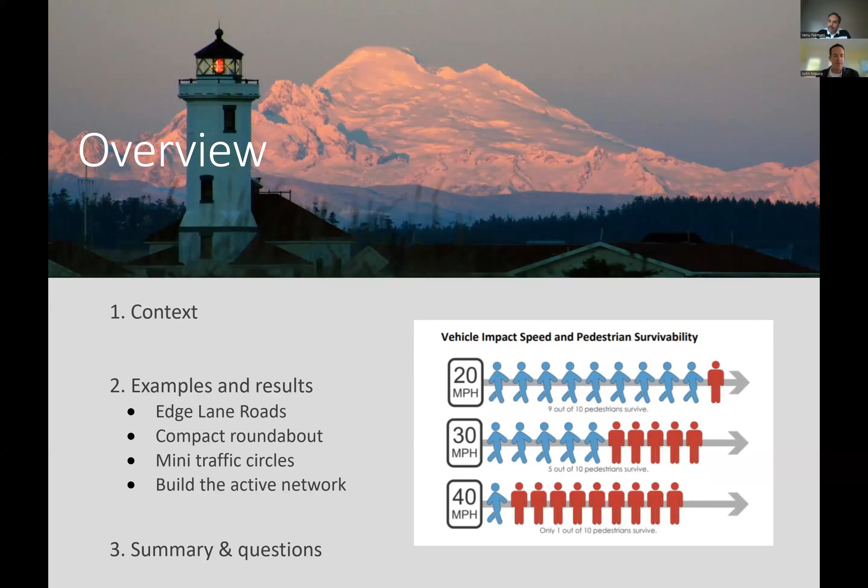So I'm going to take it down to the very small scale level of a small town of just about 10,000 people. I'm going to do a few things. First, I'll give you a little bit of context about this place, because everyone likes to think they're special, but I think we're very unusual for a small town. Then I'll go through a few examples, and some of them take what Dong Ho and Venu were talking about at a larger scale and bring it down to the local, village scale to talk about implementation. Then I'll do a quick summary, and I want to leave some time for questions and answers too.

I feel compelled to do this because I've actually worked for the city of Seattle and Cascade Bicycle Club in my history, so I'm very much a bike person. I don't hide that in my role as the chief executive of this small town, but I've kind of oscillated between these things. So I feel compelled to say, I feel like you are my people, and I'm really grateful for the attention on this. I really take this as part of my seriousness in my role to continue to make Port Townsend a very safe, accessible place for all modes.

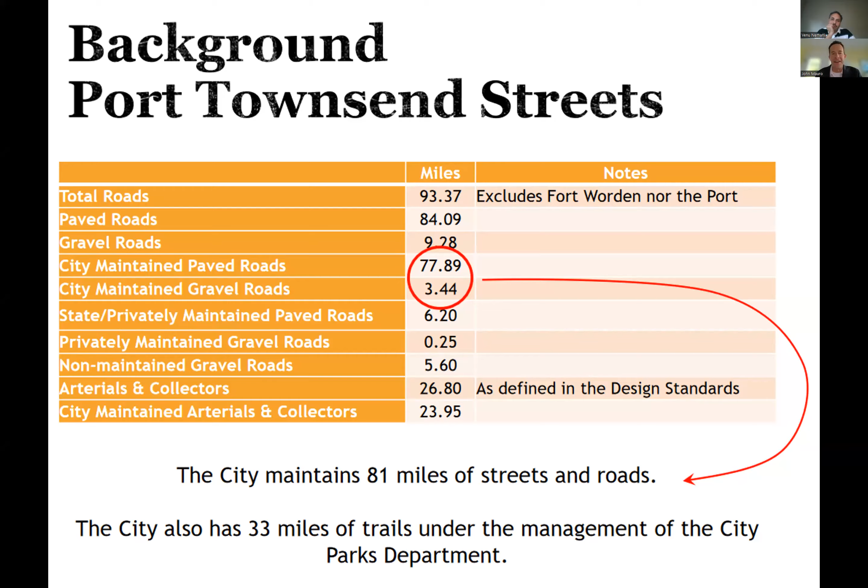And to some degree, I really appreciate that, because some of my bosses, my elected city council, often advocate for keeping our streets and side streets in relatively poor condition, because they are a very effective traffic calming measure. We also have quite a long history of encouraging traffic calming, and it's one of the things we get most requests for from our residents.

I'll dive into a couple of these examples in a second, but just to give you a visual of our main street into town, which is technically Highway 20, a state road, into Water Street - how we worked to constrict the lane there and actually get bikeways and delivery space was quite innovative. F Street, which I ride at least a couple times a day on my bike ride to work, and the speed humps and medians there - I can't take credit for that.

That was done long before my very few couple years here, but it was an exemplar project. And then Sheridan Street, just even taking the things to a median to allow for safe crossing, and those bike lanes there on Sheridan Street.

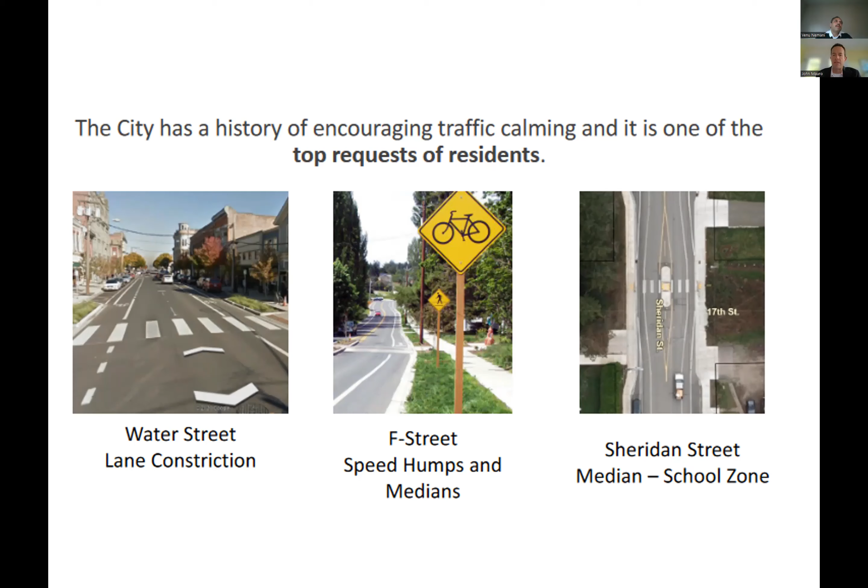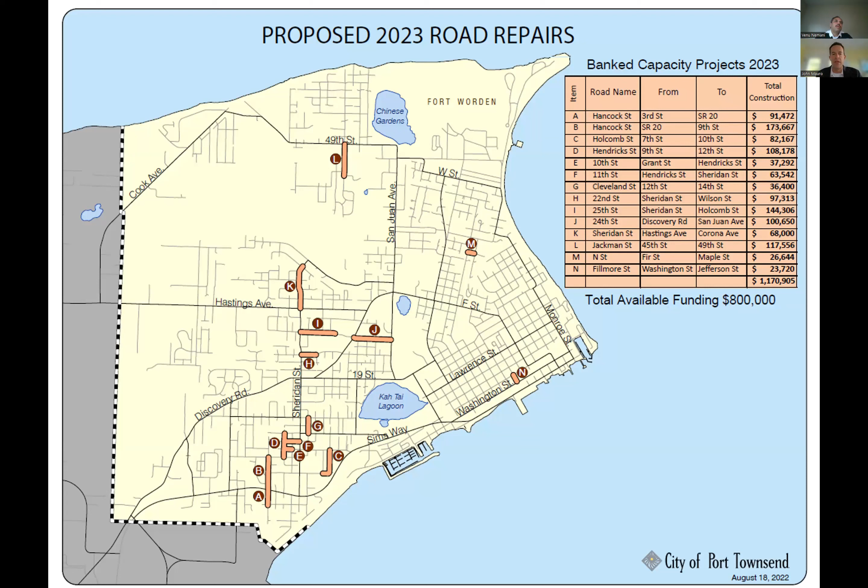The other thing is we continue to invest, and I don't want to get too stuck into this map, but again, we're taking one step at a time, allocating small amounts of funding into drawing connections into our road, street, and trail network. This is just an example of what we're taking into our budget this year to propose to City Council as part of that process.

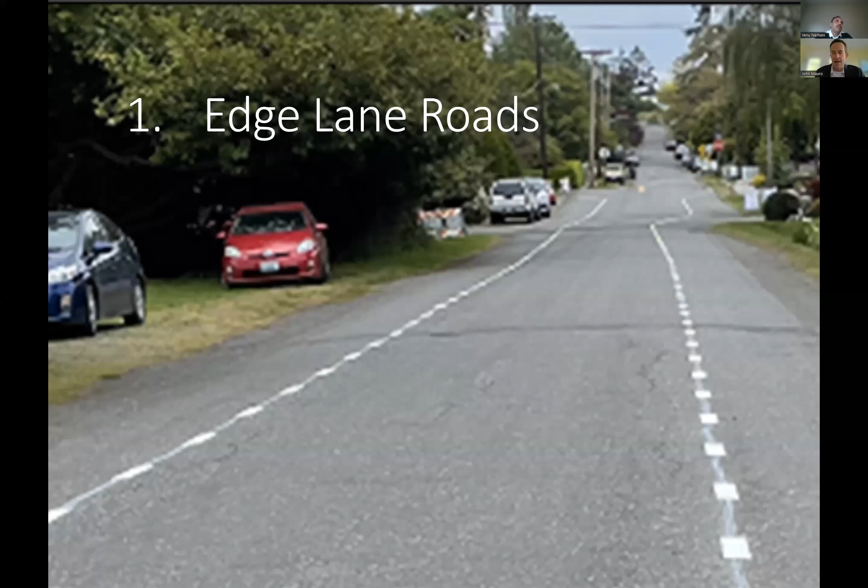All right, so second part, just 4 examples. Edge lane roads. This, on Blaine Street, from the aerial here, is a temporary project we took on this year. It was a bit of an experiment. We went out and painted it, talked to the community a bit, and got quite a lot of feedback.

Edge lane roads are pretty proven to, at least in larger studies, I think it's like a 44% reduction in crashes. People go slower, it creates some uncertainty. If you're head to head with a car, it provides space for people walking and biking. And it also really helps us with maintenance costs.

I don't want to say we should let all our streets kind of go feral, but to some degree we don't have a choice in a large network. We need $50 million to actually bring all streets up to snuff, and that's much larger than our total annual budget as a city. So it's a creative approach to get a multiple set of outcomes — safer, reduced costs to maintain, you can delay the need for replacement, and better outcomes in terms of crash data.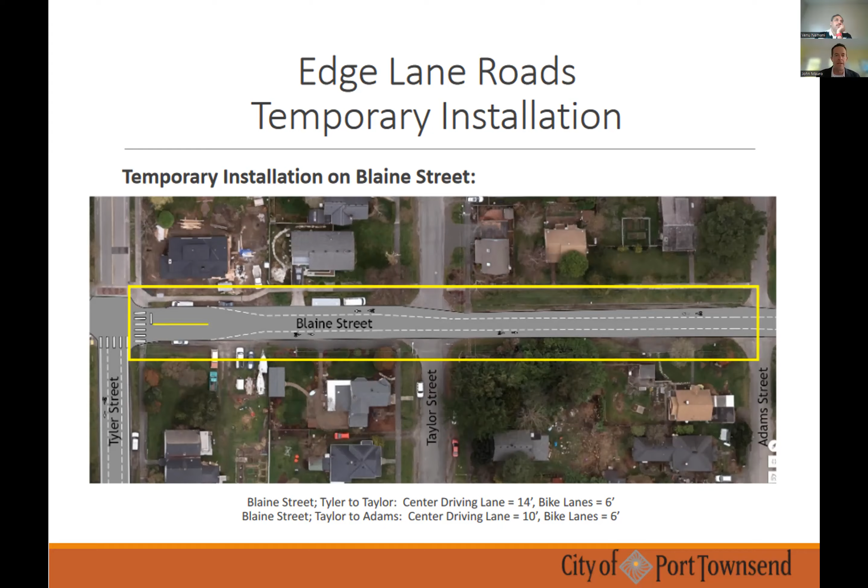This is kind of what it looks like. Interestingly, it's being striped permanently today, so I can say it looks good when I went out and looked at it. We'll continue to roll out edge lane roads across the city as we go.

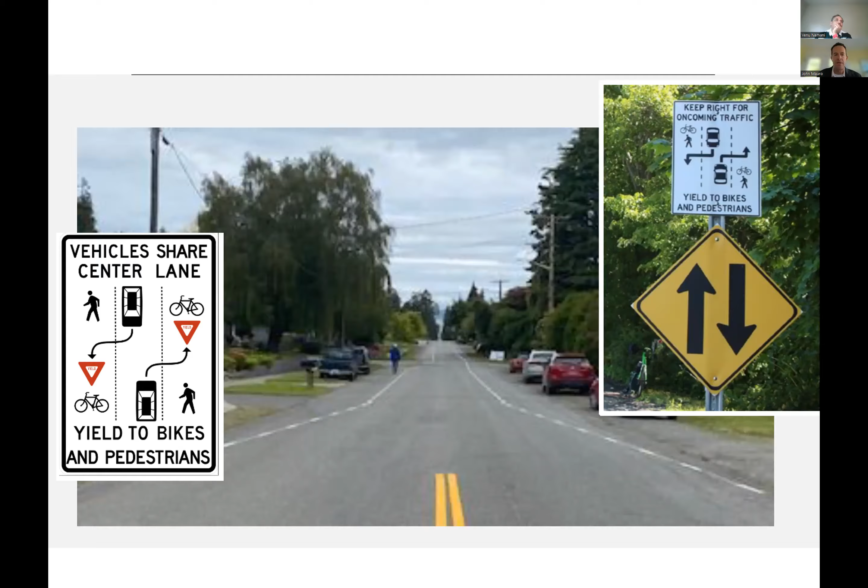The other example I wanted to share was compact roundabouts. Dong Ho talked about this eloquently earlier. And I will say too, with a lot of appreciation for WSDOT, we've worked through this project with them to some degree of success. It's not built yet, it's just beginning to get onto the drawing board.

We have an intersection that would normally be a signal replacement — we'd put stoplights up, or keep them there. But our residents and city public works and transportation team thought we could probably get a different set of outcomes if we took a more creative approach. Top marks to WSDOT for being open to that conversation and really helping to drive it.

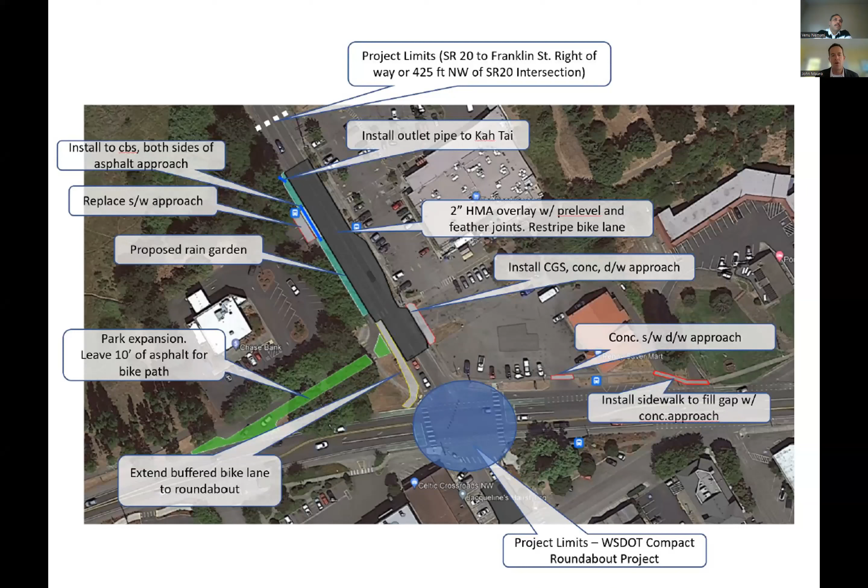Won't go through every detail here, but this is kind of what it looks like now. The pavement's in poor condition, we've got issues like stormwater to deal with, but some of the interventions include a rain garden and buffered bike lanes, and reclaiming some of that current roadway space into park and other uses.

This is just concept, but you can see we're sketching out ways to really add value to the roundabout. I think there's a perception in town among people who ride, bike, and walk that it's potentially more dangerous, so we're trying to do some education. We went out with our disability awareness group and blindfolded ourselves to walk across for that experience. I've got high aspirations for this project when it happens.

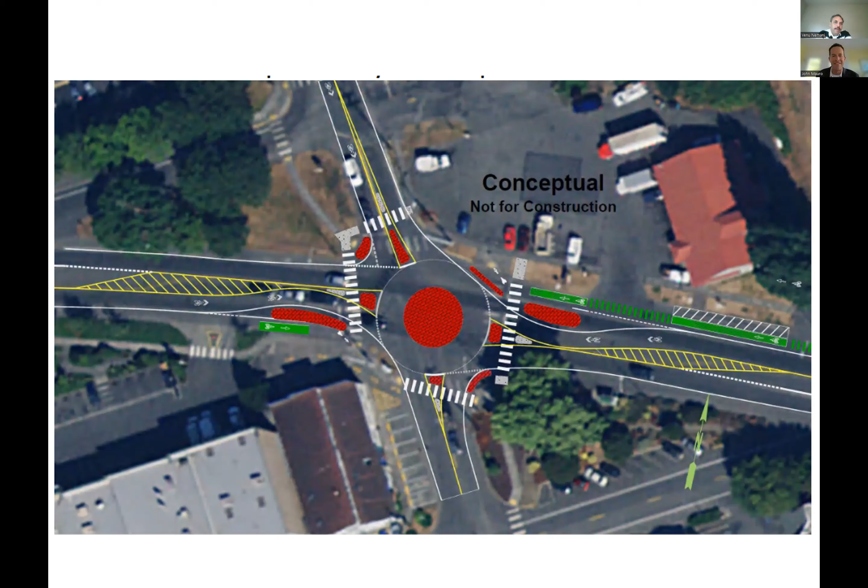This is my final slide on that one. On that corridor, this is what it looks like, and the width of the lanes — essentially what we're proposing to do in that space.

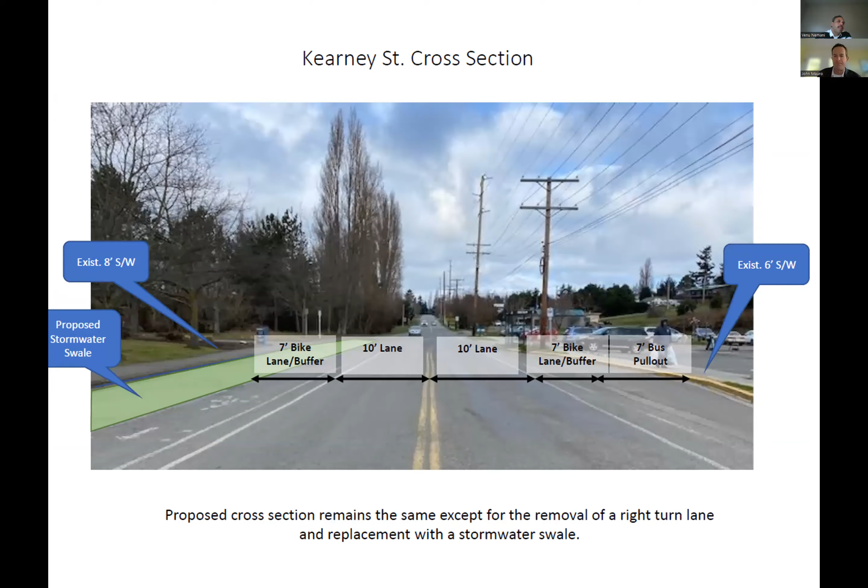The third thing I wanted to share is, again, kind of gritty for a small town with limited funds — working with a community to crowdsource a pilot project. We heard we need to control speed, and we said great. And actually, people passed the hat for that.

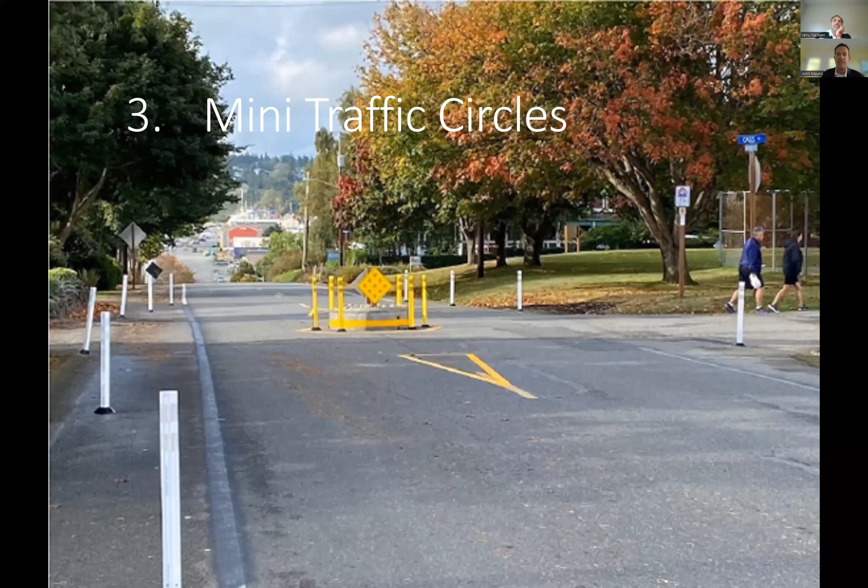A little bit of sweat equity, much like projects I've been involved in Seattle, but some pilot testing of really bringing a little bit of Seattle to Port Townsend in terms of those traffic circles. So this is the experiment before we went full bore. We tested them—these aren't our examples, but temporary cones and markings—and really thought, okay, we want to achieve these results, but we need to know if it works before we invest neighborhood dollars.

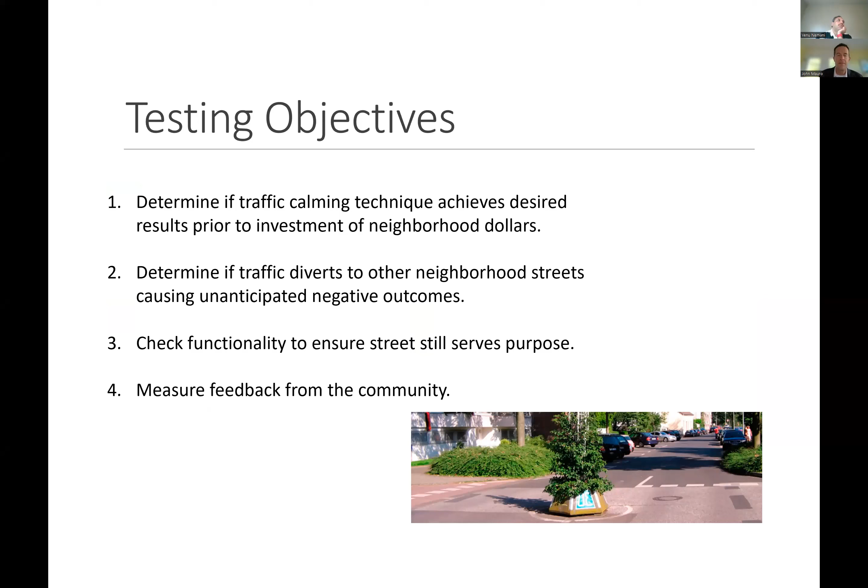The community actually came up with $10,000, and then we were going to match that with staff time. We need to determine if there are unintended impacts on other streets, just to make sure it still serves the purpose, because it's actually a higher volume street, and get a sense of the feedback. So we tested it, put them in on a trial basis for about 2 months.

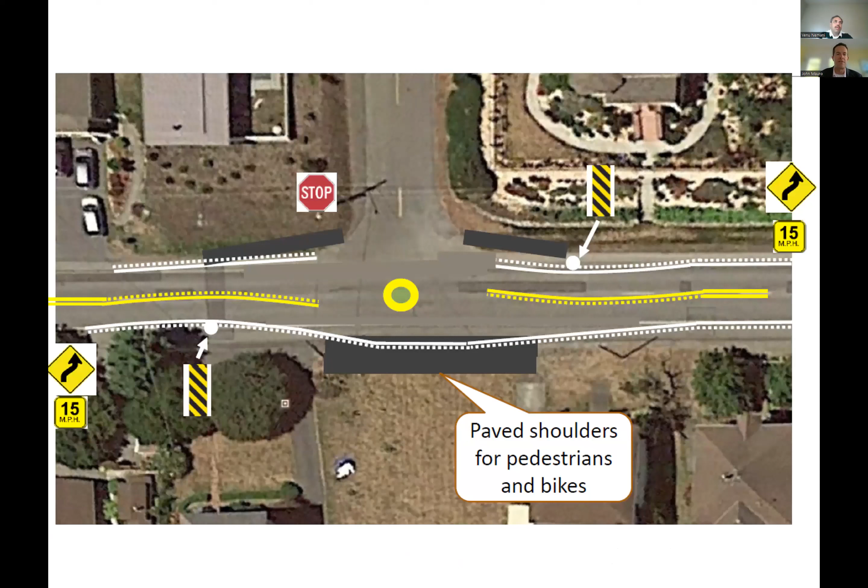This was a couple years ago almost, and it went from looking like this to this for the test. You can see we did some signage, and then started claiming some of the space on the shoulders as well. And ultimately, this is the design that is now permanently installed on Washington Street.

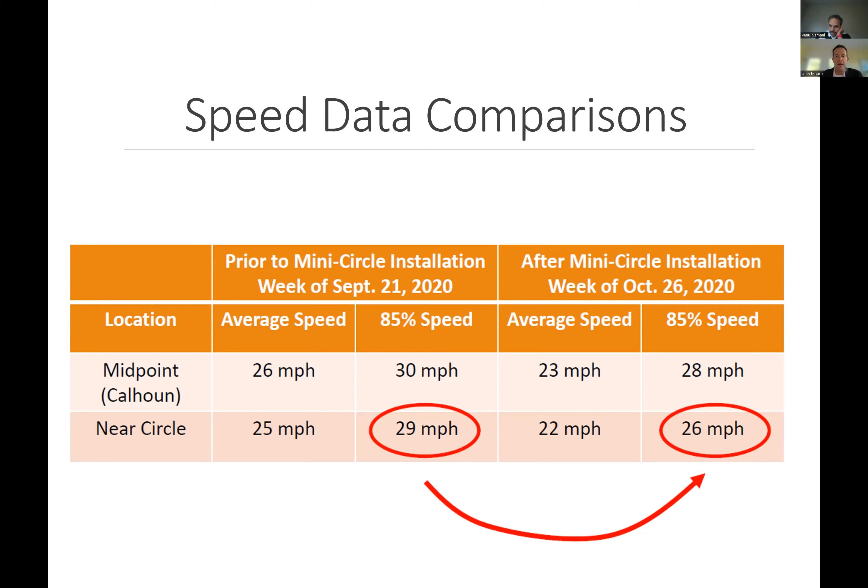Of course, show me the data—got a chance to talk about that with Mike Bloomberg at one point, and I love that phrase of his. But the data show that it kind of works. So even a 3 mph drop in the 85th percentile speed is kind of a big deal for us. You might be marveling at the low numbers there across the board for streets in Port Townsend—we tend to drive and walk and bike relatively slow—but that to me signals it works, and so we went ahead with the investment.

If you focus your eyes on the turquoise blue, where it says Salish Coast Elementary and that arrow that says existing cycle track, that's what I was just showing in the slide. There's about a half a mile along that corridor of Discovery Road that goes to a roundabout where, frankly, there's quite a lot of development planned, and we anticipate a lot of school trips to be made. Again, top marks to WSDOT and TIB for providing some funding. We also received some federal funding, and in a small town like ours, receiving $5.5 million of funding really makes a project go a long way.

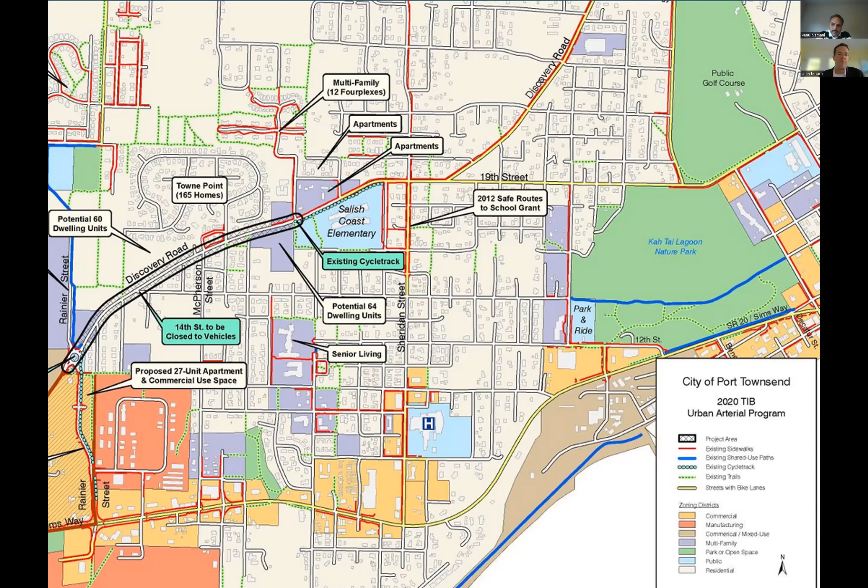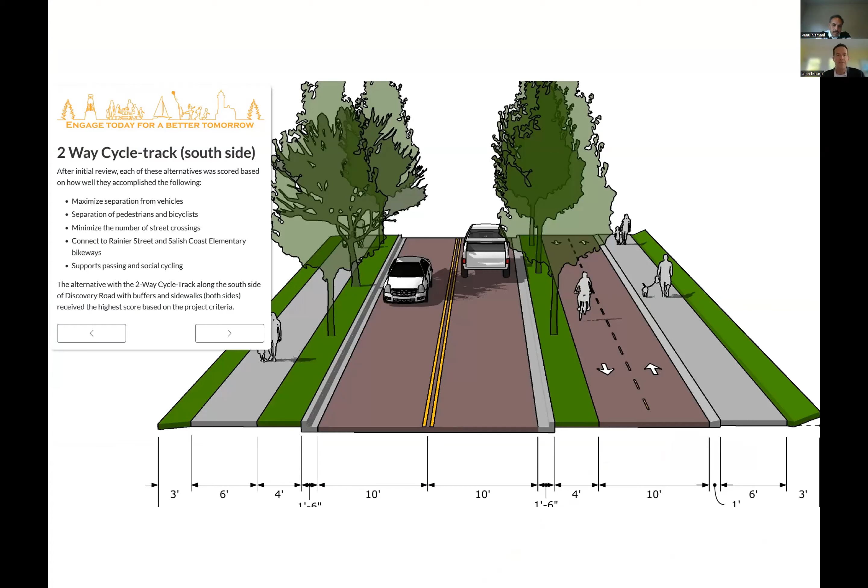So we're going to rebuild that roadway. We're going to put a two-way cycle track on the south side, and a pedestrian sidewalk on the other side, which it does not currently have. That's roughly what it will look like. And then, of course, some raised crossing examples from other streets that we'll use as part of the design features on Discovery Road to do some traffic calming.

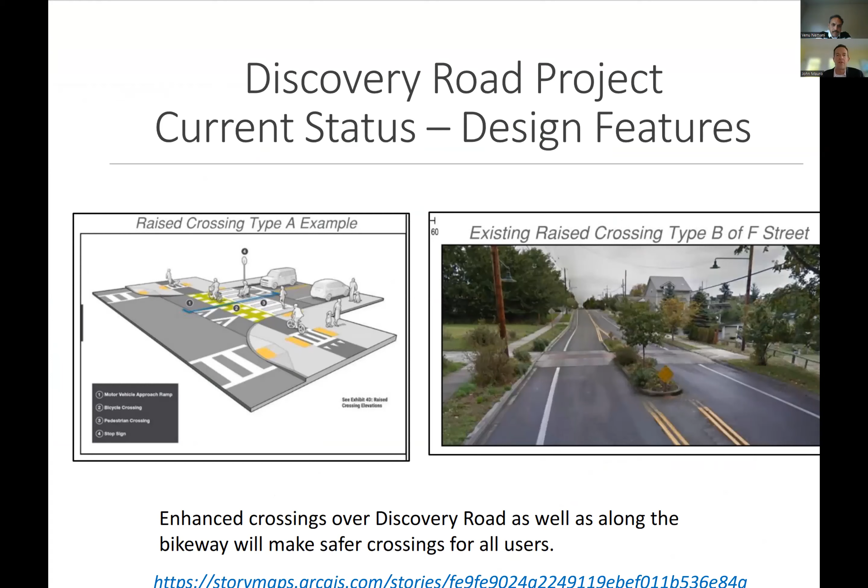I can talk a lot more about this, but we do want to leave some time for Q&A. So I think I've done that—back over to you. Thank you.